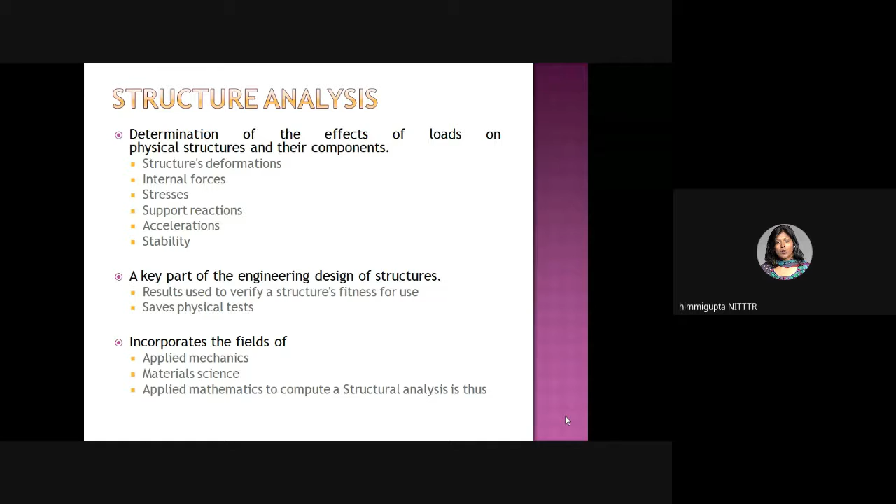So this analysis, of course, it's not a very simple thing. It is using applied mechanics, material science, and also applied mathematics, which are being used for structure analysis. So this is also quite an interdisciplinary kind of thing.

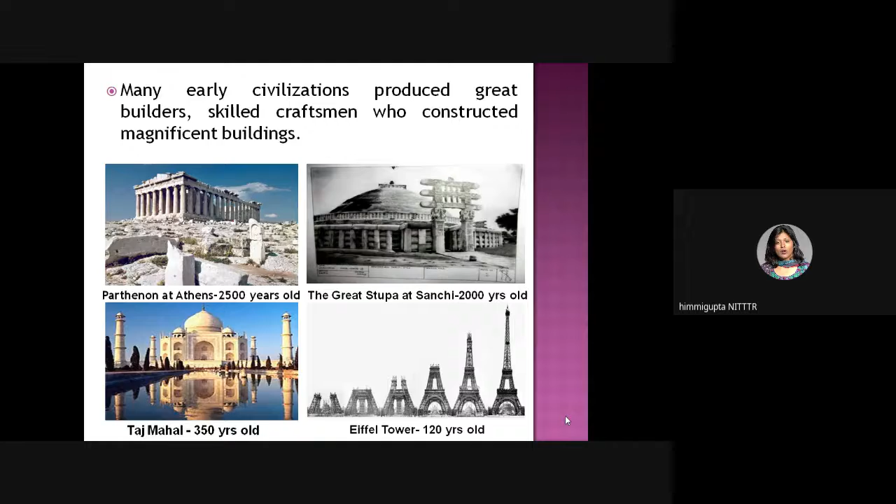There are other early civilizations who have made great buildings, great craftsmen. Examples are all in front of us, these buildings. As far as we can think of, these buildings have stood the test of time. They're still standing there. These monuments tell us what kind of feats human beings have accomplished in terms of analysis, design, and construction of large structures.

I have a personal liking for bridges somehow, because that's how I started my career. I'm always fascinated by bridges. That's why I chose that as the first career option. So definitely this is something we can always be proud of as civil engineers, the type of marvels we are creating.

These days, nothing is segregated into boxes. You cannot say that this is civil, this is electrical, this is mechanical, and what civil is doing, electrical or mechanical has no concern with. So everything is interdisciplinary, and infrastructure is, of course, a multidisciplinary task. We have civil engineers involved, we have electrical, instrumentation, mechanical engineers, architects. So many types of people are involved, so many types of specialties are involved.

In terms of structural systems, which you might remember, which we have been doing earlier and which we are teaching our students, there are many old types of structural systems which were used: arch, walls, trusses, free forms, domes, they're still very prevalent. Then frame structures, the most common one we're using these days, bearing walls, shells, tensile structures, all these kinds of things.

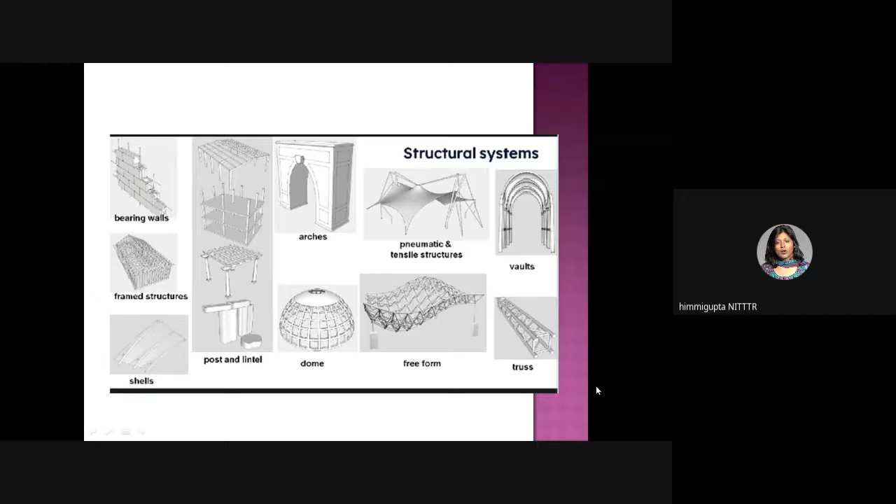So when we talk of geometry, structure, and architecture, the first point is feasibility. Is it feasible to do it? And then we look at the functionality. What will be the space used for? Accordingly, we have to go for design, the kind of columns, beams, and all we are doing. What kind of space we are designing?

Then comes the technology, which is the engineering of building. And there, if you see, the options are endless.

Another aspect which we must look at these days is sustainability, which is actually the need of time, which has become so important because our human actions are becoming such that we have relentlessly just used the resources of the earth, considering like we are the only ones on this earth. Although I know it is food for thought that we are just one of the many species which are on the earth. So sustainability has become so important.

Otherwise, if you look at all the old vernacular architecture, those times also buildings used to be there, but at that time they were all intricately had a fabric which was interacting with nature. If you look at wherever you are from, whichever state you are from, if you think of the vernacular architecture, the old types of houses that were there, let's not talk of the modern concrete jungle buildings. I talk of mountain regions like J&K, Ladakh.

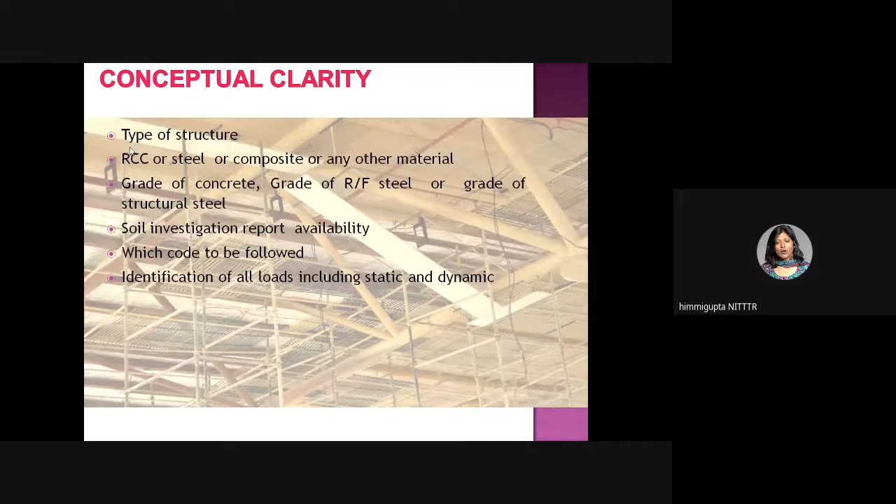You should know which code has to be followed. All kinds of loads need to be identified, then we have to decide on the method of analysis - whether to go for fully elastic, elastoplastic, or plastic analysis. The engineer should know what will work well. India has moved to limit state design, but there are still many places where working stress is used, because there's a consideration where cracking is very important, so they prefer working stress. That's a call which has to be made - conceptual clarity has to be there.

Plastic analysis is when you're going into the full limit of the concrete - not just restricting to elastic, because elastic is just a very small portion of what concrete strength can provide. Then types of claddings are very important. Construction aspects like ground clearances should be there. Method of construction, the sequence - they're all very important and have to be thought of beforehand.

Everyone is now on the site with the machinery, the material is there, but we cannot move forward because nobody looked into this ground clearance, the utilities and all those kind of things. So these things have to be cleared earlier.

Then visualization is important. You must be able to visualize the entire geometry of the structure, like lifts, stairs, openings, how will they be. It's kind of a judgment to understand, to have a whole view of what will be done, what kind of connections you want to give, what will be the critical load condition, deformation, the types of foundations.

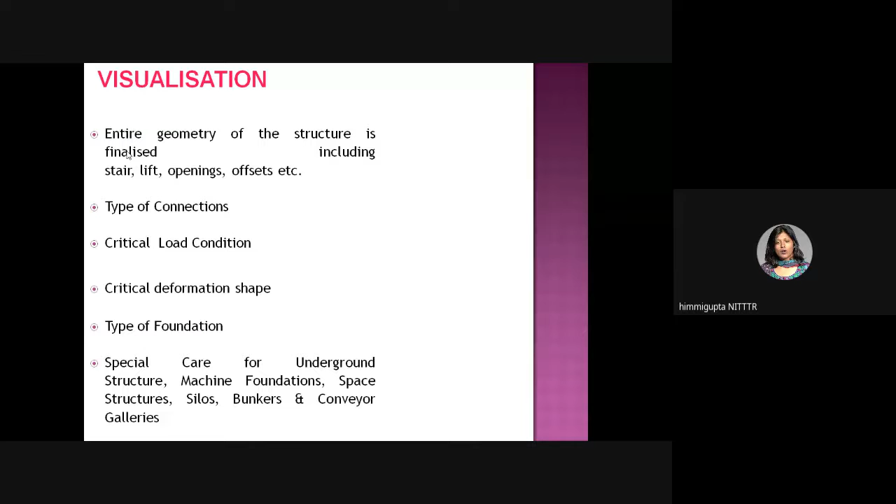Then, of course, some underground structures, machine foundations, all these kind of things, they require some special considerations also. In analysis modeling, I've already spoken a lot about it.

One thing I would definitely like to stress here, based on my experience as a design engineer. When I started my first career as a design engineer, we used to have very active discussions with the client. There used to be regular meetings to understand where everyone is, as the engineers involved in the project used to meet once a month or something.

Even when, as a design engineer, I've submitted my design drawings, when it is going to the contractor, they still used to come back to us with a lot of things. 'What happened today? The pile that you had mentioned, the way we casted it, there is a little batter in the pile in 1:12. Should we go ahead? We don't want to dismantle it, we don't want to break it. I've already put money in it. Please tell me, can I go ahead or not?'

The pile cap that I cast today is a little short on one side and a little long on one side. Can I still go ahead? A lot of things still come up, and again you're running the analysis to see with this new geometry, will things work or not, how much changes will be required. So it is a constant process that has to be met.

I would also stress on aesthetics. I have already said this, and I again and again stress aesthetics are very important. A good looking building, a good looking bridge can even fetch internal revenue for the government, via tourism. We all know the Golden Gate Bridge in San Francisco. It was built as a bridge only, but they built it in such a beautiful way that it is fetching tourism now. So the government is earning money there. Why not? What is the problem with that? We should think of those kinds of things. If we are making something, let's make it good.

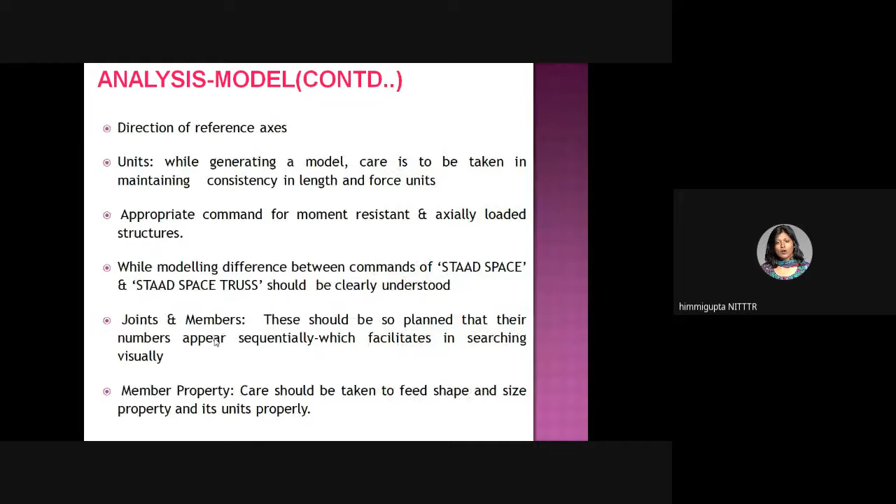Then, of course, with design, there should be understanding of various things - I will not go into detail of this. The loads have to be understood. Codes are there for us. We must clearly know which kind of loads are to be considered for this particular building.

And then post-analysis checks are very important. As I said, we should not become a dummy, just looking at 1,000 pages of output of a software. We should understand where these numbers are coming from, what these numbers mean. This is one very important aspect which we see lacking in today's students - they don't understand the basics, and we would all agree with this. The basics is what will always help us, no matter what technology comes, software or anything. Softwares are always built with the base of these basics of civil engineering also. So if you know the basics, you can learn any new software.

If you're learning a software without understanding what is happening behind it, then you will be good for that software only, with no real understanding. So we must motivate our students to build these foundation years as civil engineers when they're doing their BTech or diploma, so that they focus on understanding the concepts.

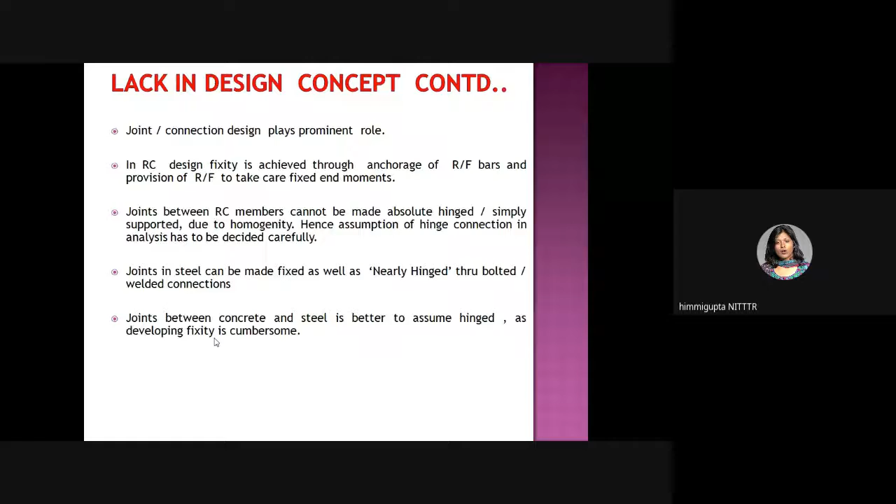That is very important. Then understanding the members - tension member, pure compression, bending, all those kinds of things should be there, because drawing is the ultimate, as I said. Children, civil engineers going in after completing their degrees and looking for a job, should have understanding of what are BOQs, what is steel detail, how the drawings are made, the kind of numbering and all that is given - those things should be known.

If we have concept clarity, construction clarity, design clarity, these kinds of problems should not arise. So these are the kinds of problems which the structures usually face. Of course, when I talk of damage during an event, that is beyond our control - that's something different.

But still, as we design our structures, we give some factor of safety, understanding that in the event of a maximum considered earthquake - as per IS 1893, there is design basis earthquake and maximum considered earthquake - that's how the code is. The code is not saying that if an earthquake of scale 9 comes, the building will not even have a single crack. That is not what we are designing for.

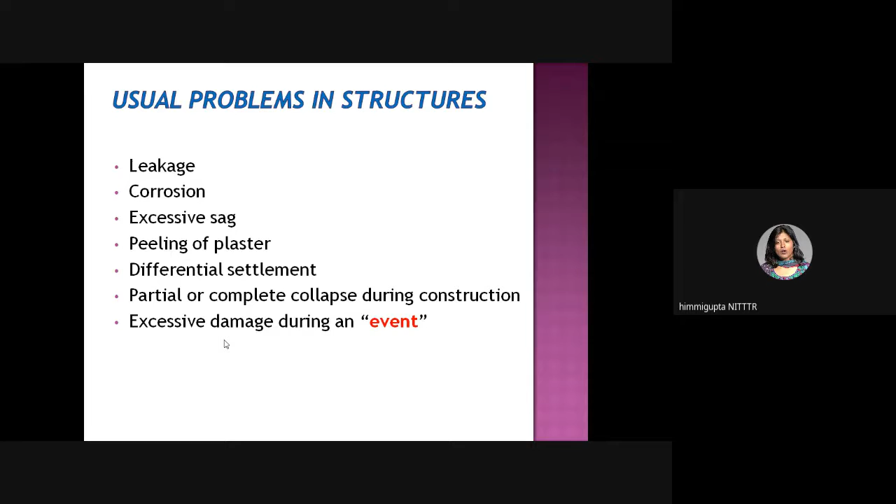That would be very uneconomical, because the likelihood of such an event happening is 1 in 100 years or something. So that building might not be used for 100 years, and if I start designing for that, I'm just making it uneconomical. So we have to understand these kinds of things.

It is very important to understand the requirement of the owner - the client who is spending money for this building. That's why when we talk of good infrastructure development, a good infrastructure development company will definitely have constant liaising with the owner about what they are requiring. And the owner is told from time to time what is happening, what kind of designs have been approved, and everything.

The requirement of the owner is that he wants to know - will there be a guaranteed performance of the structure? How much damage will take place? Where will it take place? What is the estimated downtime cost? So engineers have to be more accountable, more efficient, and more specific these days.

Of course, there are so many tools, updated from time to time, from hand designs we are now going to updated design tools. There was a time when I did my BTech, from 2001 to 2005, we did all designs by hand, and I'm so thankful to my teachers who taught us that, because today I am confident that I know what is happening in RCC, I know what is happening in steel design.

At that time, SAP and all, they were just picking up. Now, if we talk of today's students, they want to straight away start doing SAP, they would straight away want to do ETABS and FEM without even understanding what happens inside. So of course, tools are there from time to time, but as I say, tools are there to serve us - we are not there to become slaves of these softwares. You have to understand what is happening.

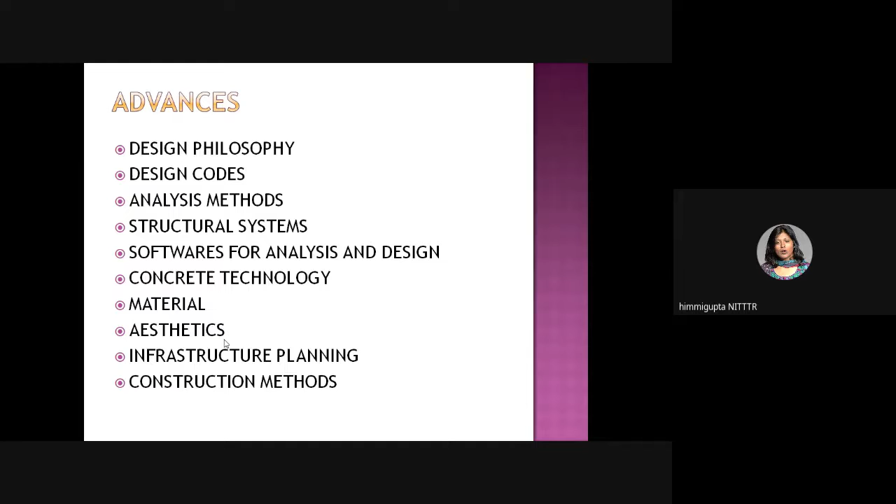Even construction methods, we have seen so many things have changed. These days we have gone somewhere else - we are talking of construction 4.0 now. So I will show you what that is. In another 4 years or so, we are set to be the 4th largest infrastructure project market. So we have to make our technical workforce exposed to these latest emerging technologies. But I would say the basics always help - if your basics are correct, you can learn any new technology.

There are so many fast track techniques also. A lot of things are coming out, a lot of imperatives. Government is giving boost to infrastructure development, because that will never stop. If a country has to progress, economy has to progress, infrastructure development can never stop. So there will never be a dearth for good civil engineers, I would say.

People say civil engineering mein boom hai, recession hai. I would say I have seen the worst of times. We have seen the times when we graduated from our BTech in 2005. It was said that civil engineering to bilkul low par hai, mitti katta wale log hai, inka job mein to kuch paisa hi nahi hai. IT was at a boom at that time. I remember IT people used to earn in lakhs, and civil engineer ki thousands mein job hoti thi. Parents used to ask, wo to wahan chala gaya IT mein, tumhari salary to itni hai. These kind of things happen.

But what I feel is we shouldn't get demotivated. What I say is there is never a dearth for good civil engineers. If you're a good civil engineer, there will always be market demand for you. You're always there to come up with good structures. If you don't know your basics, you have just done your degree aise kar liya bina kuch samjhe, then of course no good civil engineering company will take you.

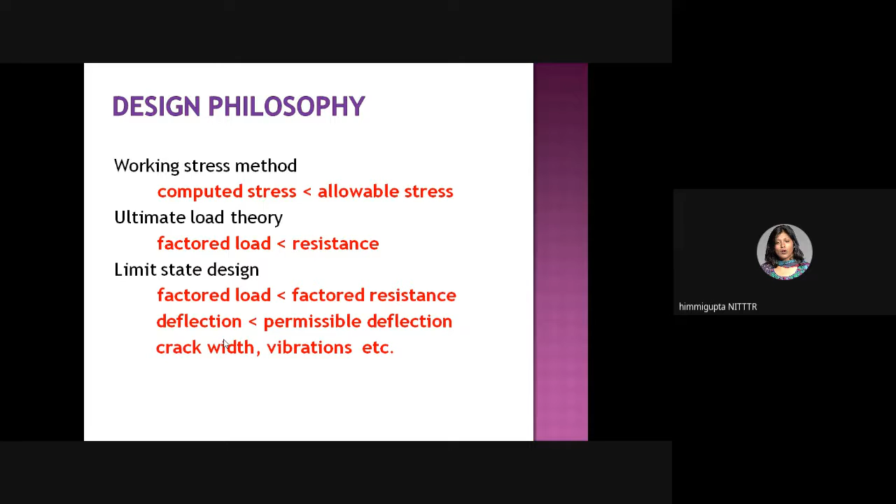I'll just skip these philosophies. Of course the earlier philosophies, like working stress and all, they concentrated more on how the performance will be, assuming that. So they were all prescriptive - they used to prescribe how it should be. A building is designed today to conform to prescriptive criteria in the codes. They regulate what will be the acceptable materials, what will be the strengths, what will be the systems - structural systems, stiffness and all. So with this prescriptive approach, we are trying to make buildings capable of providing some satisfactory levels of performance.

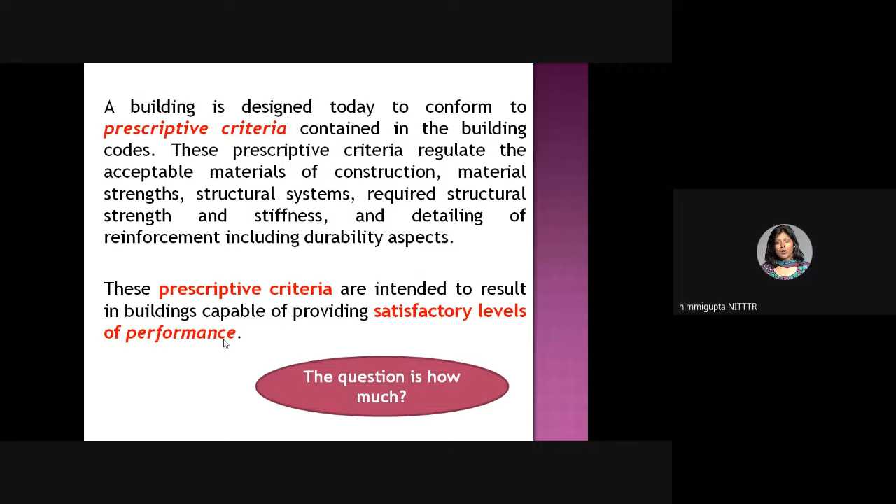So now the question is, how much satisfactory is it? That is another question which is asked. So that is where, as I mentioned to you, these days people are going for this performance-based design.

Eurocodes have already adopted this, and in India too this is picking up. I think in some years to come even our codes will be updated for this performance-based design. This is a little different from the prescriptive approach of limit state, working stress, and so on. Here, we assess the consequences of an extreme event from a given design.

This is a process that considers how a building is likely to perform under a given event, as its design reaches predefined stages. So given an event, how likely is it to behave like that? Basically, some performance objectives or indices are developed.

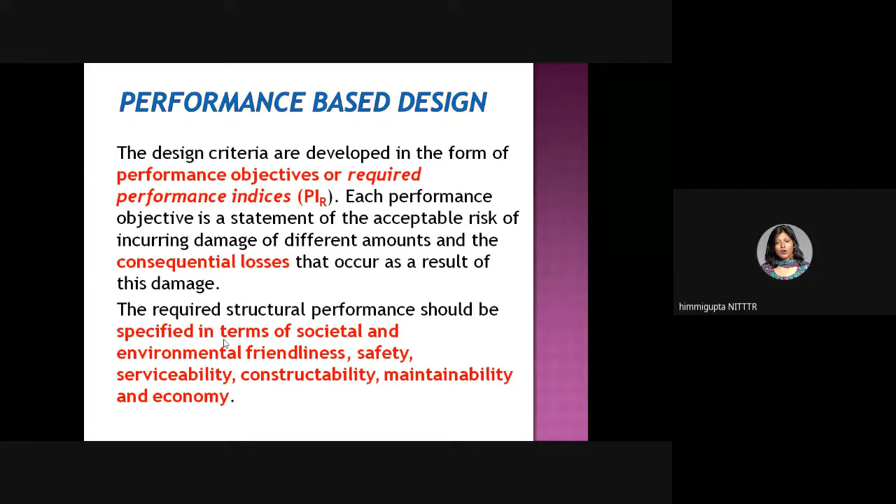Consequential losses are defined, so that under this criteria this kind of loss can occur at maximum. That's how the building is designed. I will not go into much detail, but if you're interested in this, you must look more into it.

Basically, how it goes is: you select the performance objectives, develop a preliminary design, then performance capability is checked to see if it meets the objectives. If yes, okay. If no, then you have to redesign. The objective is how the building should behave in case this kind of event happens.

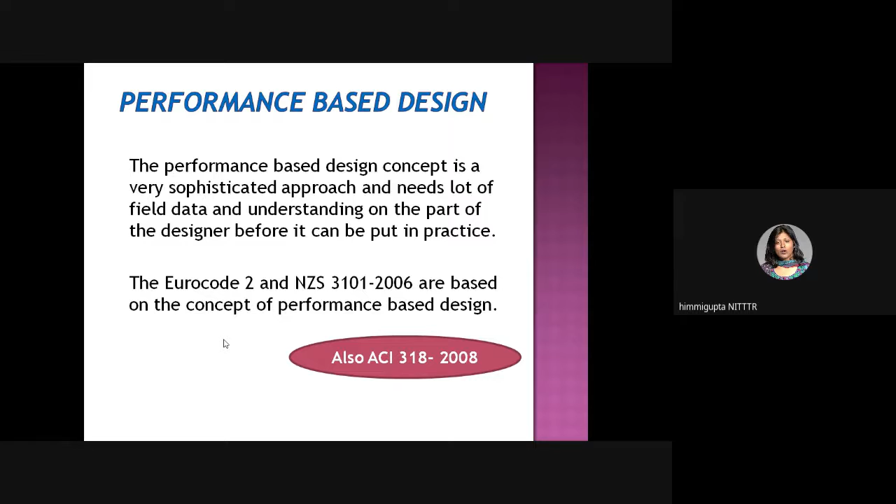There are some performance levels or indices defined. One is immediate occupancy - in case damage happens, it's to the extent that even after the damage, immediate occupancy can still be done.

Then there's life safety - the damage will be such that property loss may occur, but life safety will be ensured. The third one is collapse prevention - we're not letting the building collapse, because that is something which is never allowed.

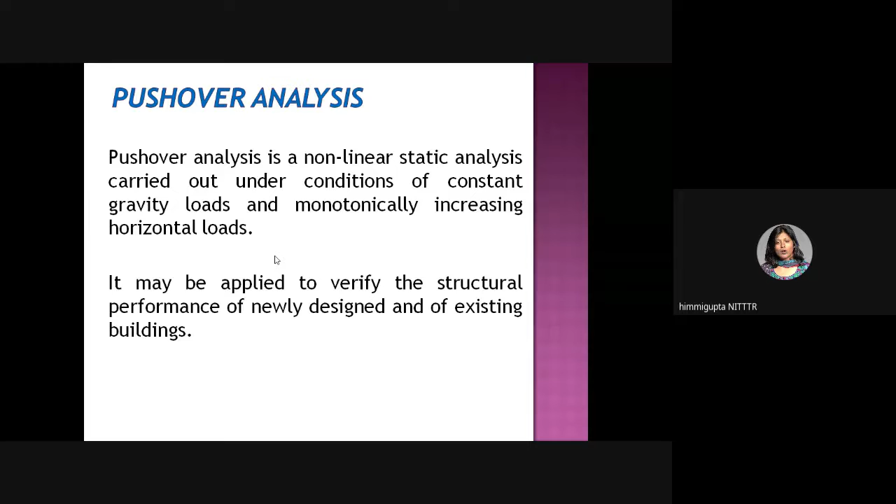Pushover analysis, which is done here, is a non-linear static analysis. Constant gravity loads and monotonically increasing horizontal loads are applied here. That is how it is done.

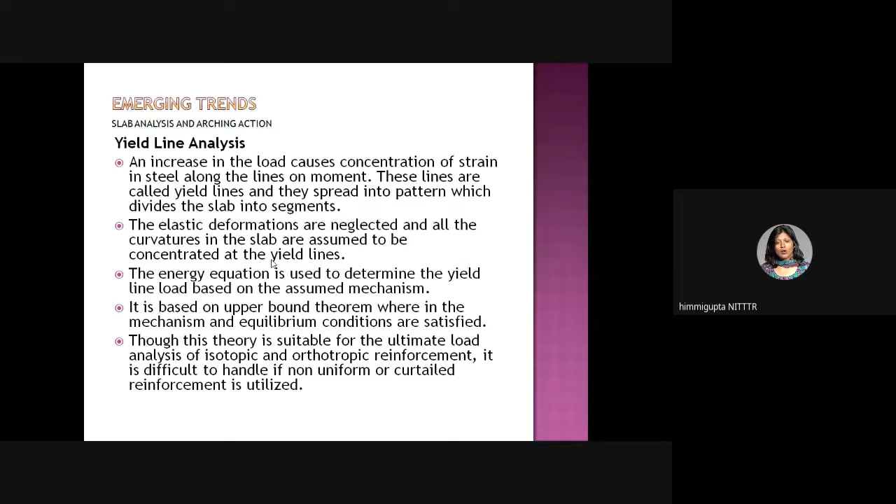Now there are other trends. If I talk of analysis, when we're looking at slabs and arches, elastic analysis of plates is something which is picking up. Yield line analysis is also becoming more and more famous, more and more prominent. So we are looking into that.

There are so many softwares - FEM is there, so many softwares are there. I always say, even Excel is a very good tool for design. We have actually done full bridge designs also with Excel.

Excel is a beautiful tool if you have the understanding of it - a lot of things can be done with it if you have an understanding of macros and everything. Even with VB and all, you can do a lot of things with Excel also. So that can always be explored.

Of course there are other things, and even CAD is very important, as we said, because drawing is our ultimate language. So CAD is very important. In India, AutoCAD is used.

MicroStation is also very prevalent on the US side - they use more of MicroStation. In India, AutoCAD is used more. Both have their strengths, both are good ones, and of course that is also required.

Infrastructure planning, as I said, is also very important these days, because different types of engineers have to interact throughout the life of a project - right from its inception, feasibility, planning, design, to construction. With this infrastructure planning, like BIM, which is building information modeling, virtually everyone is able to see what is happening in the building.

Like, say an architect has made the design, he will upload that on BIM. So the structural engineer, mechanical, electrical, they'll all be able to see, okay, this is the one. They can start working on it. So if someone does something, they can update it, and in real time everyone is able to see everything.

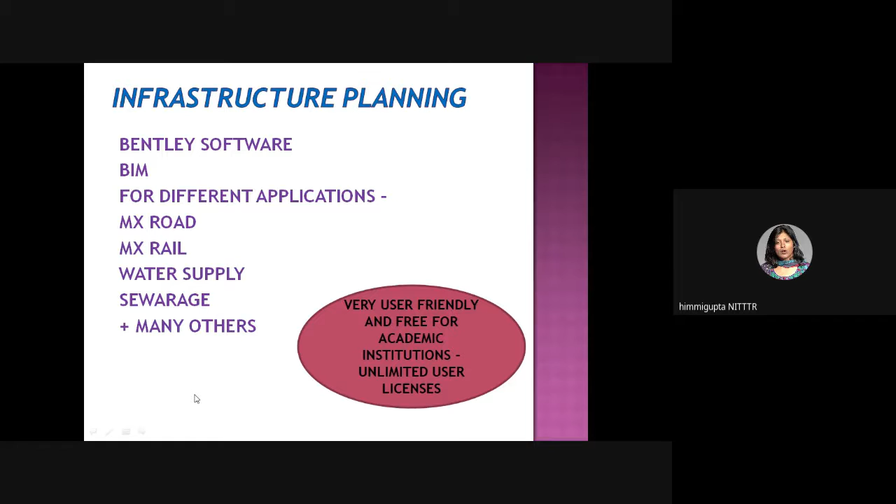Even for water, sewerage, lighting and all, these days there are softwares for everything, so the work can be made easy, no doubt. So that's what I had told you already about BIM.

Aesthetics, as I said, are very important, you can do a lot of things with it. With alternative materials, so many things are coming up. Even the government is doing a lot of things. In 2020 only, the government gave guidelines, and even IRC has now put in guidelines that cement treated base, sub base, waste plastic, geosynthetics, all these kinds of things can be used. So even the government is understanding that alternative materials are required now.

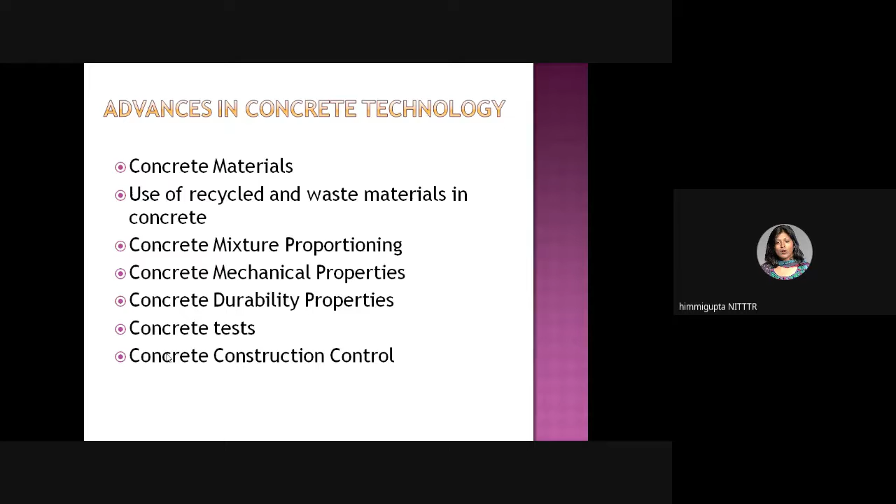In concrete technology, since we're talking specifically about RCC materials, the use of recycled and waste material in concrete is picking up - mix proportioning, mechanical properties, durability is very important, concrete tests, construction control, all these things are happening. When I talk of a concrete structure, what are the challenges?

As we said, first is the design requirement, then designing the concrete. Then during concreting, there are so many challenges - to maintain the temperature, have the placement as planned, finishing and curing should be done. Then post-concrete also there are things we have to be careful of - de-shuttering, chipping, grinding, all those kinds of things are there.

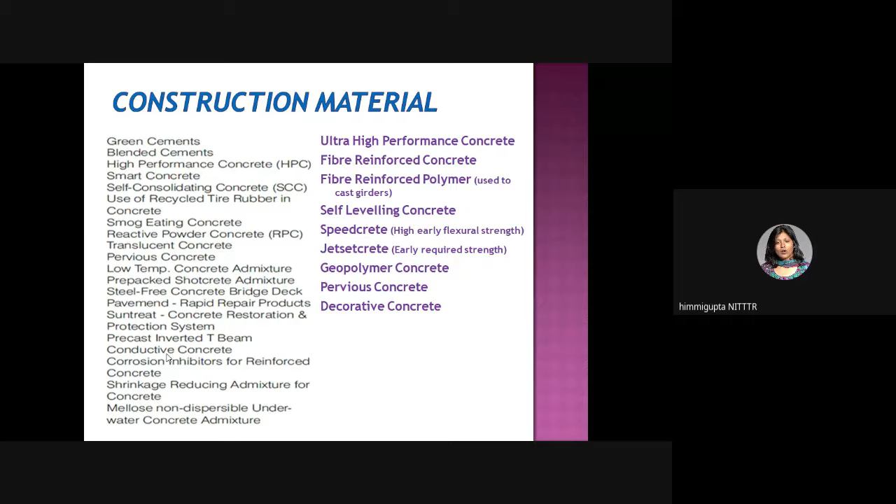And for concrete, if you see, there are so many options available now. This is a list which I just put together from Wikipedia, and this is the kind of list I found. I was so surprised to see that these many kinds of concrete are so readily available and being used. So there are so many things to see.

People are doing research. Many are claiming that we're trying to clean air with our concrete. Although concrete, a few years back, got quite a bad name because when we do cement production, almost 1 ton of cement means 1 ton of carbon dioxide we are emitting into the atmosphere. So it's not environment friendly. So there are so many things that have developed after that to offset these kinds of issues.

So people are doing this - a Stanford professor is trying to make cement that produces no carbon dioxide. Okay, so these kinds of things are there. Smart concrete, these days we have, wherein we are adding carbon fiber, almost 0.2 to 0.5%, so it is able to sense strains and stresses, and it also has good mechanical properties.

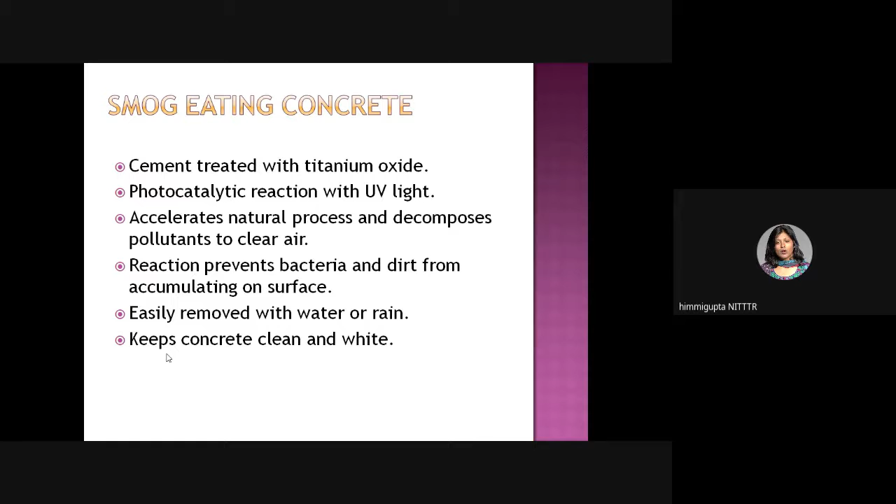There is smog eating concrete that people have developed. They put titanium oxide in it, so a photocatalytic reaction with UV light accelerates the natural process, and it decomposes the pollutants, giving clean air. Even bacteria and dirt do not accumulate on the surface, and it can be easily removed with water or rain. That's how it looks white and clean. This is called smog eating concrete.

Then RPC is another one of the high performance concretes - reactive powder concrete. It has very high, ultra high strength, and high ductility. The microstructure is optimized so that there is precise gradation, giving good maximum density. We are using highly refined silica fume also, so it's very widely used, definitely for special projects.

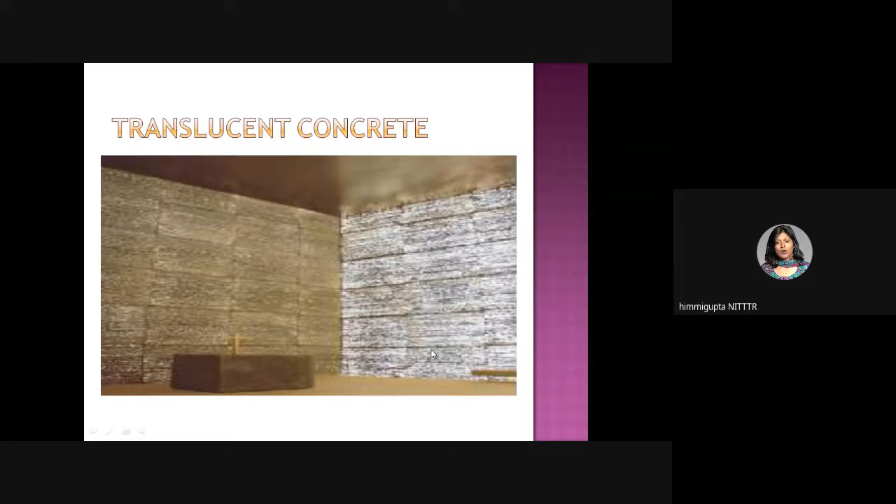Translucent concrete, I want to show you the picture first. This is translucent concrete. If you see, this kind of light is also getting emitted through it. Basically what they're talking of is embedding optical fibers inside it, so it can be made good looking also.

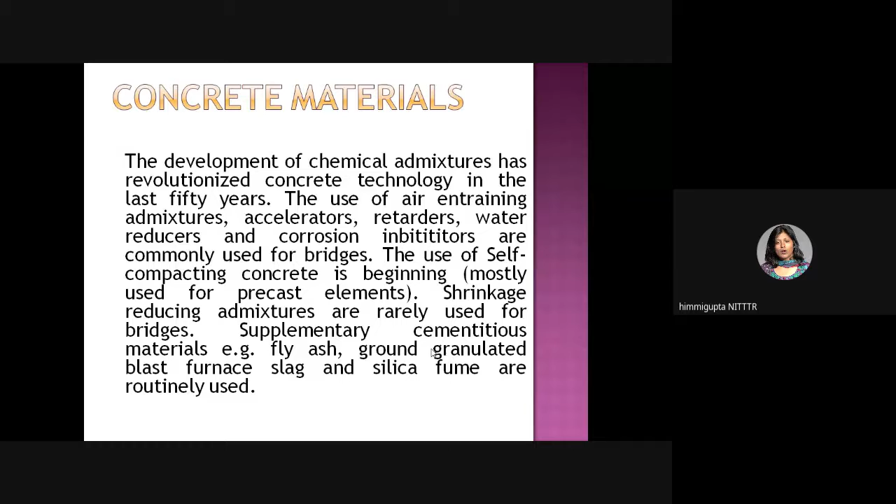There are so many advances in chemical admixtures these days with the shortage of water. Many people are now moving towards curing wherein water is not at all required. They're using admixtures for curing. Other types of admixtures are there, like rapid setting and water reducing admixtures. There are a lot of things available in the market. If you go for Fosroc, Sika and all, they have given a lot of options for that.

Recycled materials are being used. Granulated blast furnace slag is there. Fly ash is very common these days. It's good to see with new infrastructure projects, people are going for fly ash bricks now. A lot of other materials are also being tried here, so the cement component of the concrete can be reduced, or we can even reduce the fine and coarse aggregates, because those are also natural materials we are falling short of.

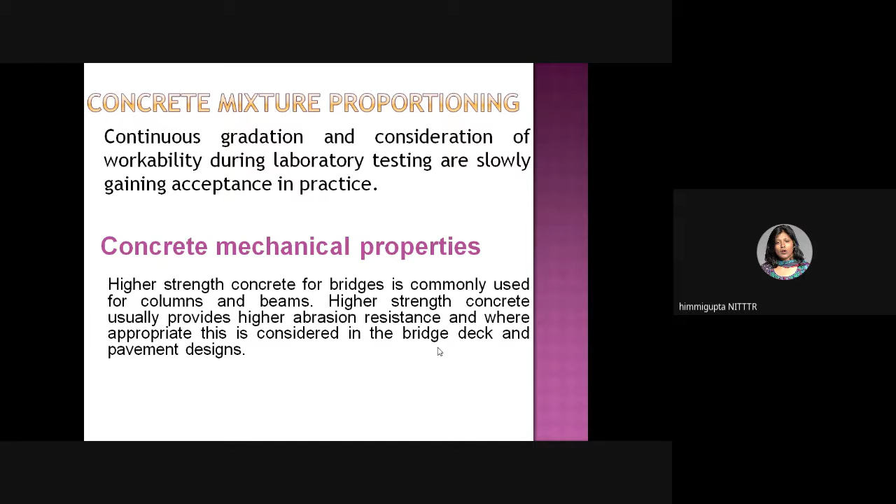Gradation is very important. That is where we can play around and get a good high strength or good performance criteria also.

Durability is of course very important these days. RCPT test has become very important. People are going for it, the rapid chloride permeability test, to see how durable the concrete will be. If we are making a structure, we like it to be durable, long serving and everything.

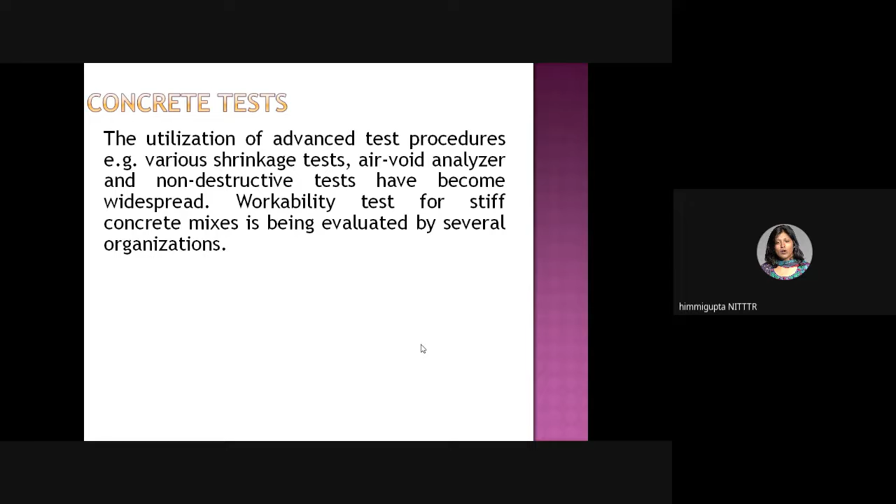Even test procedures, there are so many things. NDT these days can do a lot of things for you without having any field lab tests or anything. A lot of things are happening there also. In construction control also, we are seeing so many things. I will show you in consequent slides what is new with respect to construction control.

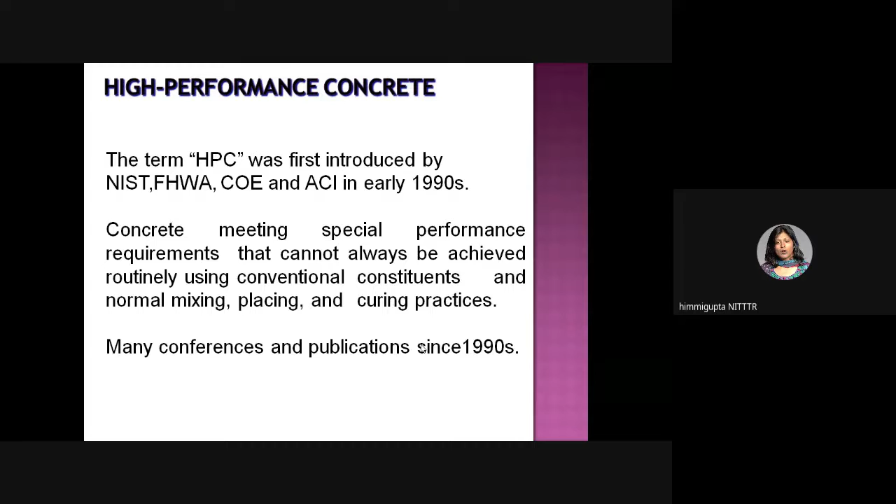Then we come to high performance concrete, which I think today's engineer must know this term. High performance concrete is something wherein we are trying to have a concrete which has a specific criteria, wherein it is giving some good performance criteria. Maybe the criteria is placement and compaction without segregation, or early age strength. It may be enhanced mechanical properties, volume stability, or durability, like low permeability, abrasion, fire resistance.

If you're talking of very cold regions, very cold countries like Russia and Canada, freezing and thawing is a big issue. They want their concrete to behave so it doesn't get damaged with that kind of weather. High performance concrete can solve that problem. So a particular concrete is developed for having a particular given property.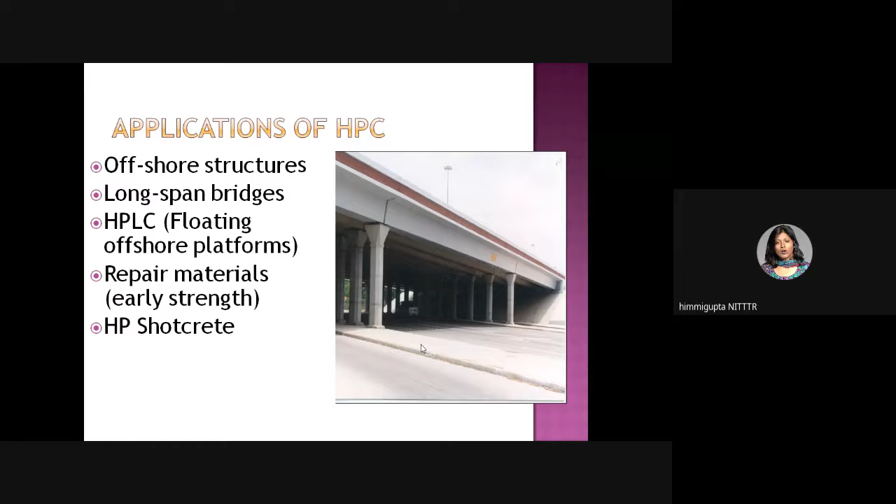Generally we might talk of high strength, good durability, good workability being used a lot these days, in basic structures, in even important structures, in repair materials. It is highly used, and of course there are advantages of it. First of all, you're trying to achieve one particular aim for that particular concrete. You can have superior qualities of it.

Reduction in structural steel can be done. High performance concrete can reduce the amount of reinforcement also, with ductility, energy absorption in seismic areas or where winds are an issue. These kind of things can give you great flexibility also.

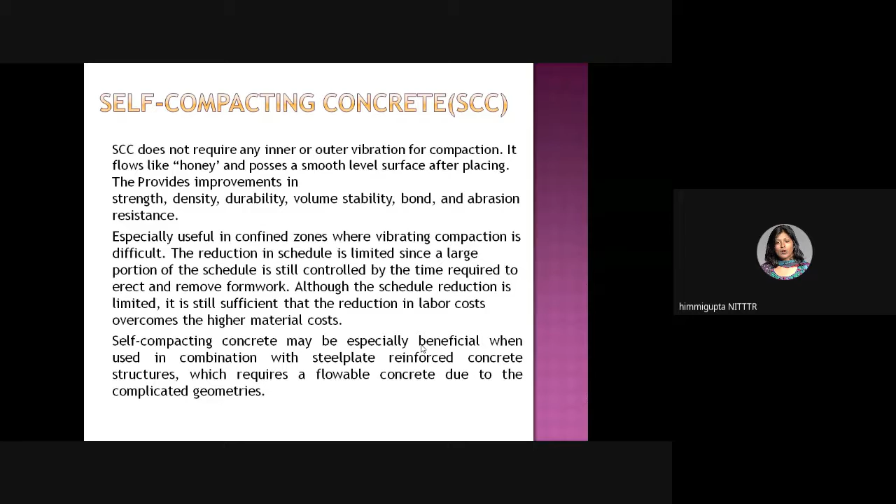Another concrete which is very famous, very popular these days, is self-compacting concrete, the SCC, the flowing concrete as we call it. It is very popular these days basically because it flows just like honey, and it poses a smooth level surface after placing. It has improvements in strength, density, durability, volume stability, abrasion resistance. So this is also being widely used these days.

People are also going these days for lightweight aggregate concrete. Mostly earlier we used to use aggregates of volcanic origin. Waste like from the palm oil industry can also be included as aggregates, so thermal treatment is of course required. People are going for this lightweight aggregate concrete also, to achieve adequate strength and thermal insulation.

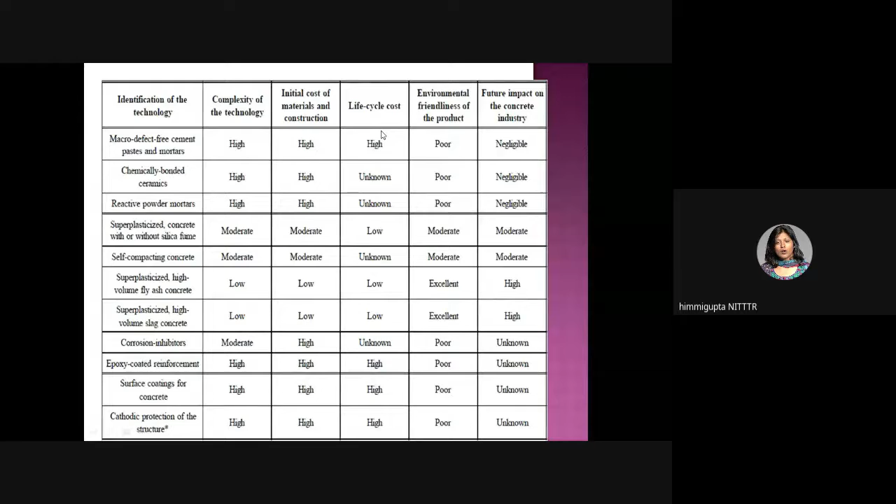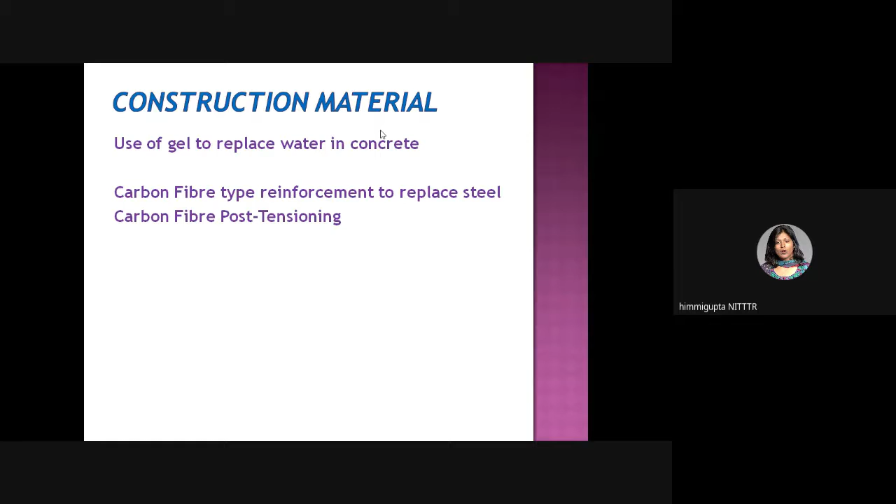Many now in construction material otherwise also, like for water replacement, gels and mixtures are there, and reinforcement is being replaced by carbon fiber type reinforcement or post tensioning reinforcement. I think this I've already shown you.

Precast industry is picking up a lot, because precast is a good option when you're talking of something which has to be duplicated many times. You can set up a yard close by, and precast can be very economical. So it has a lot of options and applications. It's time saving, economical also, and quality is there because it is made in very controlled conditions and then brought to site, as against concrete wherein you are completely relying on the workmanship of the person casting it at that time.

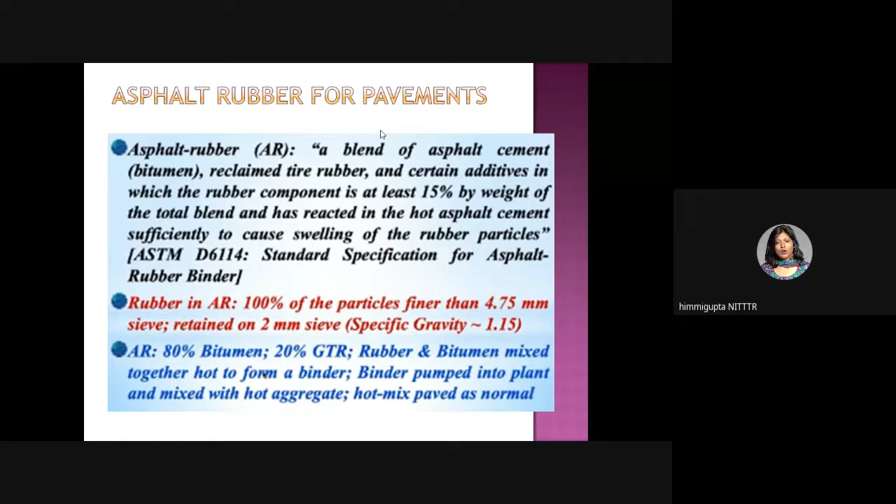This is one place I came across recently. Someone was discussing this asphalt rubber, used for pavement. It's a blend of asphalt cement, bitumen, with reclaimed tire rubber and additives, about 15% by weight. They are being used in the hot asphalt cement. ASTM is there, and it's giving beautiful results. So people are going for alternative materials now. What they observed was smooth ride, less cracking, less maintenance, more durable loads, better skid resistance and rut resistance.

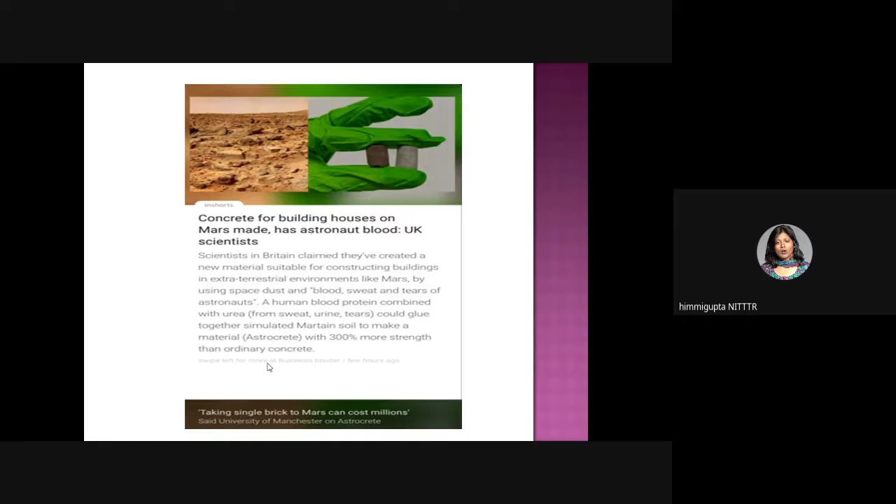This is something I read in the news one or two days before, and I thought of including it here. Now, humans are talking of building houses on Mars, so they're trying to find materials because taking material from Earth will cost a lot. Scientists are looking into options for materials that can be harnessed or created on Mars itself, and they've already had some breakthrough making concrete for building houses on Mars. UK scientists have done this using space dust and the blood, sweat, and tears of astronauts. Human blood protein, combined with urea from sweat, urine, or tears, can glue together to simulate Martian soil and make a material with 300% more strength than ordinary concrete, that's what they're saying. I'm not debating the use of blood and everything, I'm just trying to show the technology part here. People are looking into a lot of options.

The person who made it claimed it could carry a load of 21,000 kgs. But at that time, they didn't have the testing mechanisms we have these days, like pile load tests. So to give confidence and show that it was working, the inventor actually sat inside the pipe to show that his design was reliable.

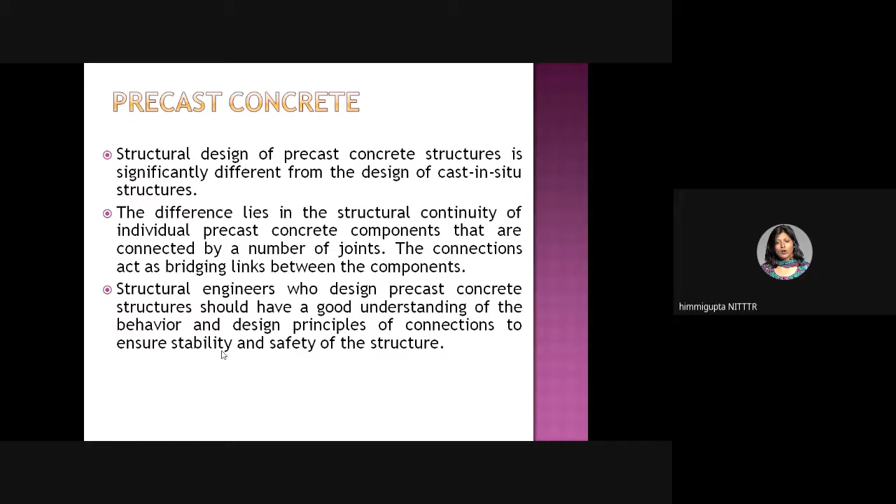So in precast, as I said, quality control is there, but there has to be good knowledge of the connections, because connections are very important here. Basically, you're taking beams and columns already cast and bringing them to the site, then putting them together, so connections are very, very important. This relates more to design for progressive collapse, diaphragm action in floors, joints and connections. Detailing is very important.

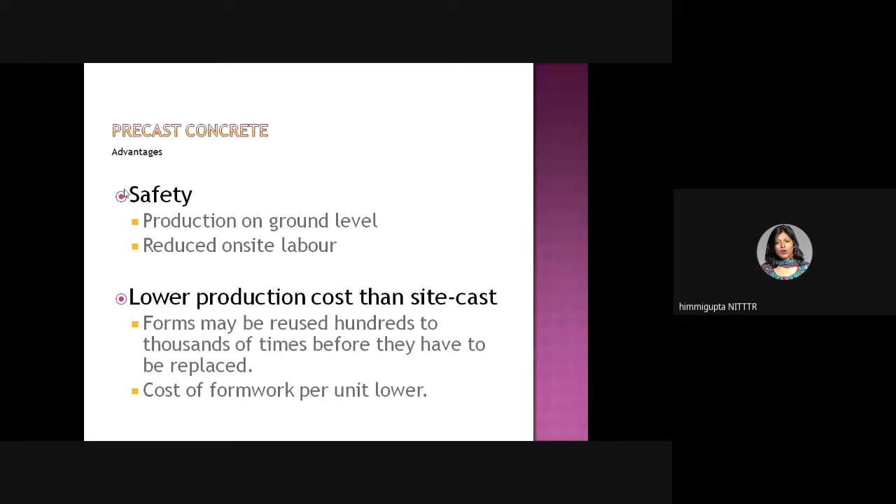So these are all the things I've already told you. Safety is of course there. You can produce on the ground level, and you are just placing it at high levels. People don't have to work at high levels, so that safety aspect is there. Then lower production cost than site cast, but again it will be more viable when the quantity is more. Fire and chemical resistance, low maintenance, efficiency, because quality control is there. So there are a lot of applications for it, and on top of that so many things are there.

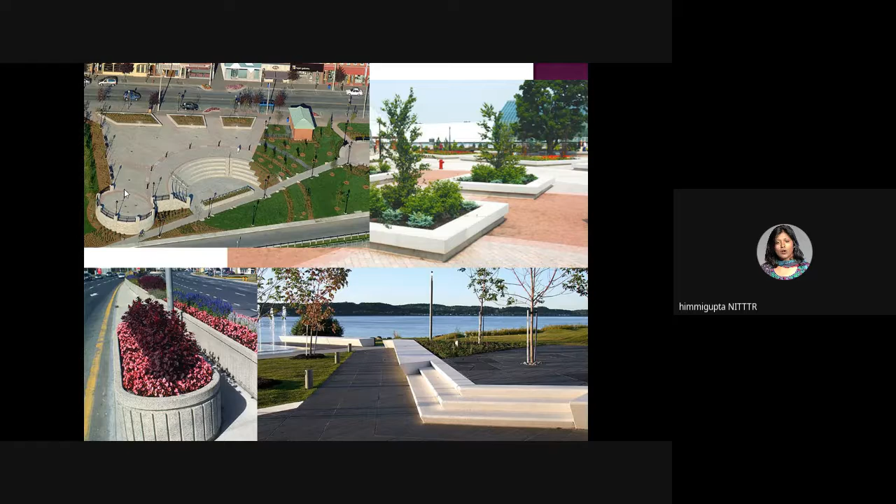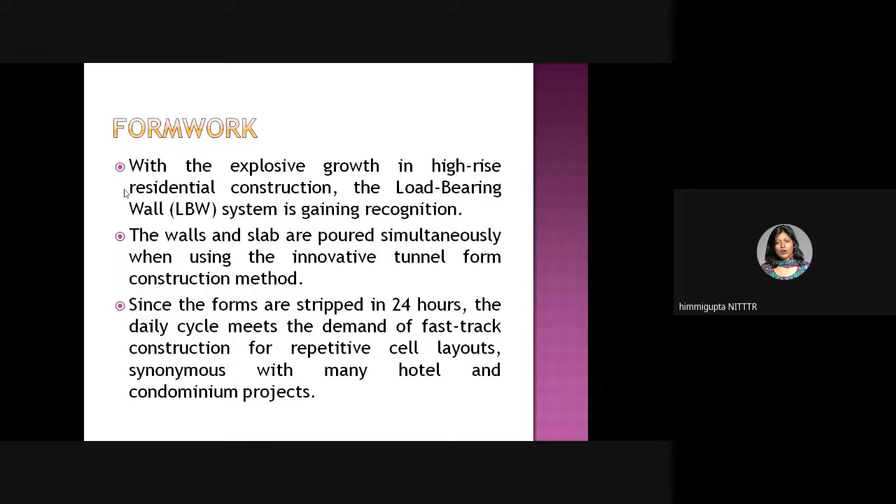Some examples, even in soil retention, panels and all. Formwork is also very intrinsic part when we talk of concreting, concrete structures. So formwork also, there are so many things which have gone up. So even there are so many options.

We are talking of slip forming these days, wherein vertically you can go very fast. So you use a formwork, cast it, and then you just slip it up. So next for the casting can be done, slip it up. Similarly, you can go horizontally also over long distances like this.

Even load bearing walls, there are a lot of things which have happened here also, like tilt up techniques and all. They've nearly lifted 100 feet. So there are a lot of things which are happening here.

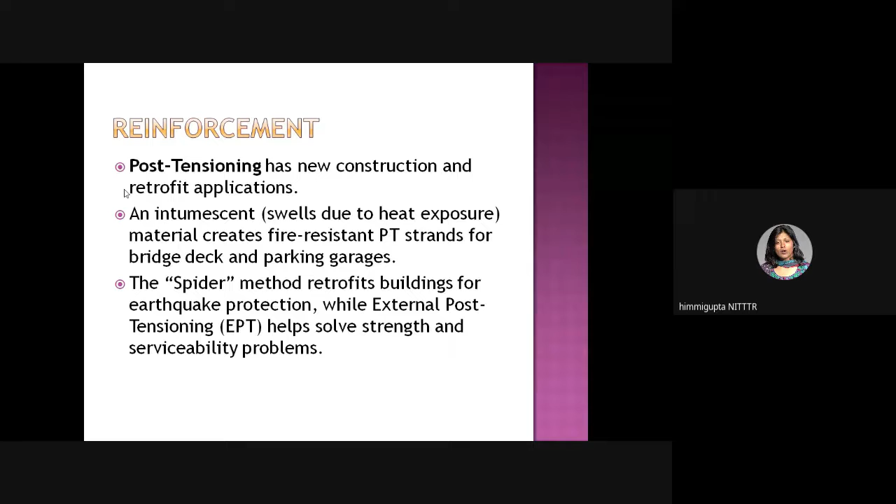Then reinforcement, as we said, post tensioning is a very good method. External post tensioning is also done, internal post tensioning is also done. And we are going for reinforcement carpets also these days, which reduces the shipping and erection cost.

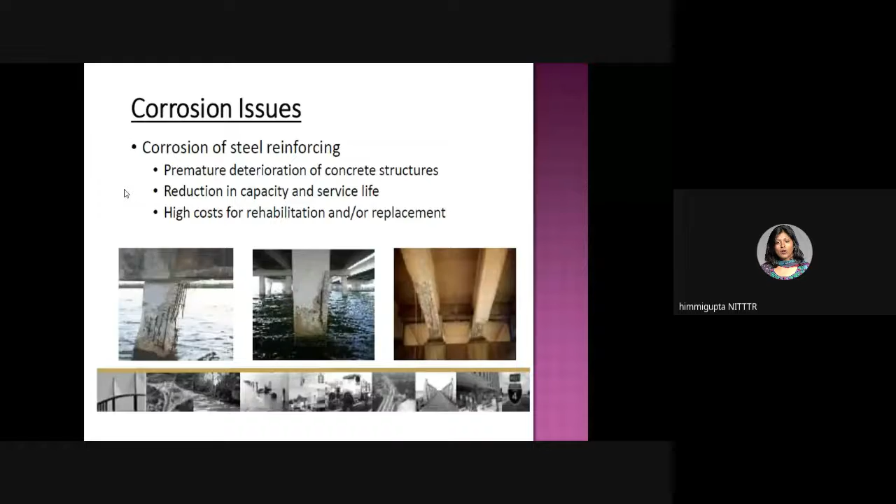Then for corrosion also, especially in coastal regions, this is one of the biggest considerations for design. There are cracks, there is alkalinity, all this kind of things are there. So for that also, there are a lot of things. Even alternative reinforcements are coming up. We can go for FRP, fiber reinforced polymer, epoxy, stainless steel, galvanized ECR, Z bars.

Concrete quality, of course the covers, the corrosion inhibiting admixtures can be put. Prefabricated FRP beams can be used. So there are rebars which are made of fibers which are embedded in the polymeric resin. Basically these kind of things are also there, what you can see here.

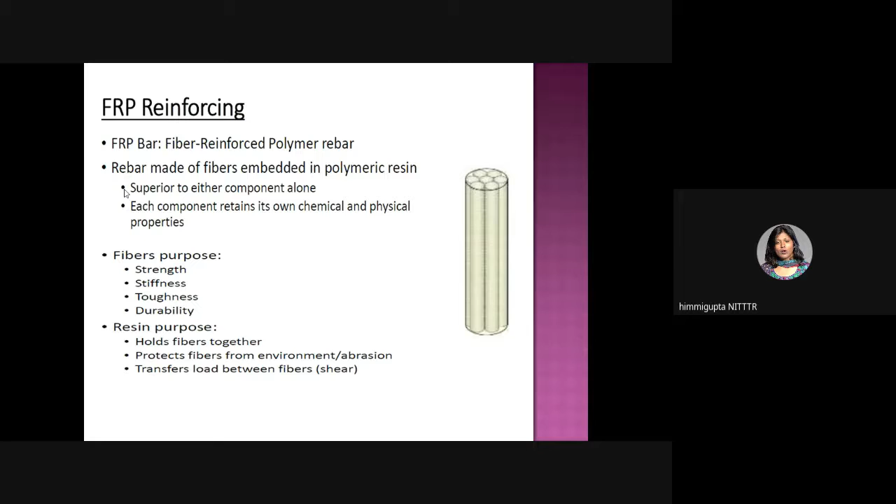And there are fiber types - you can use glass, carbon, aramid, basalt. Then for resin, if you go for thermoset types, there is vinyl ester, polyester, epoxy. Vinyl ester is many times preferred for RCC, their glass fiber is preferred. So they have advantages - corrosion resistance, high strength, all those kind of things are there.

Sometimes the disadvantage may be high cost or something, but then again, if you're talking about specialized structures, these kind of solutions are always welcome. Then FRP reinforcing, as I said, that is also being used.

And of course, there are a lot of things - not only as reinforcement, FRP as big reinforcement bars, but also we can put discrete small fibers in the concrete. So they also serve as, they are made a part of the concrete mix. So that is also a viable option. That is called FRC, fiber reinforced concrete. So their fiber type, volume ratio, aspect ratio, those things become important.

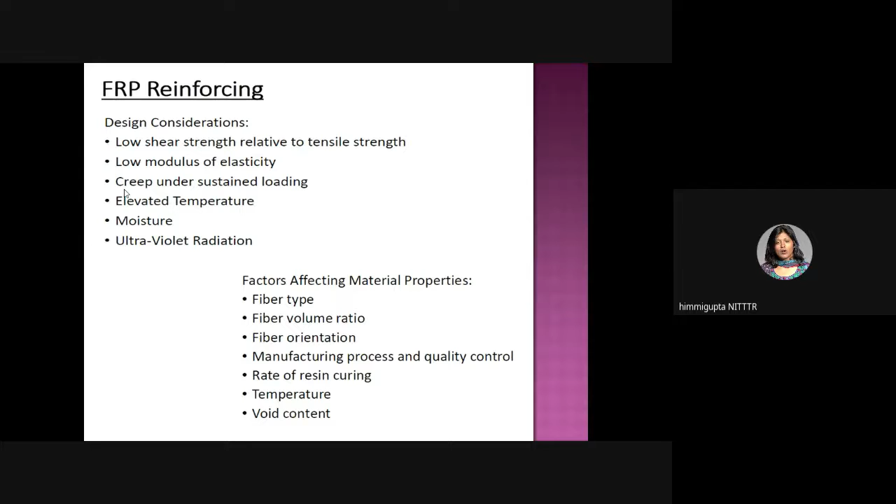I'd like to discuss something on innovative structures. We are coming up with so many innovative structures, new design concepts, new materials, new technologies, superior performance.

A recent marvel is the Statue of Unity. It is definitely a structural engineering and construction marvel. A sleek statue, it can take wind speed up to 180 kilometers per hour, it is earthquake resistant up to 6.5 magnitude, and it is a green and sustainable design also.

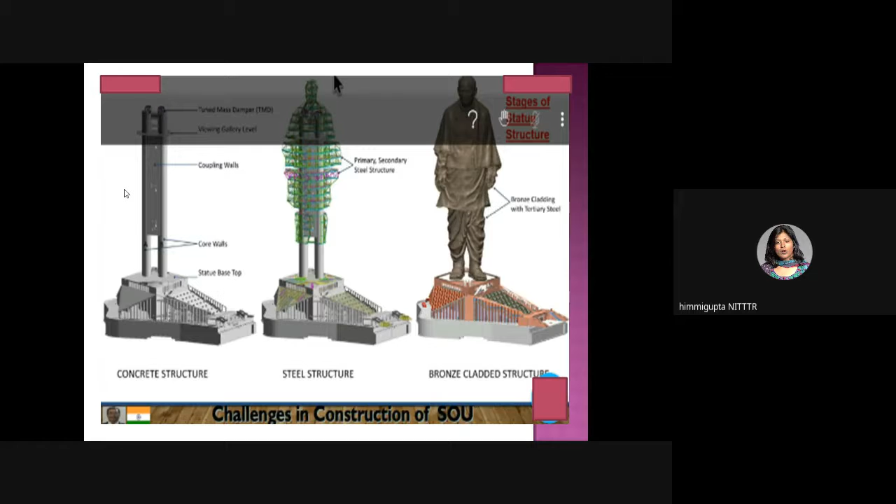A lot of challenges went into it. First they built up a concrete structure, then a steel structure around it, and then the bronze cladding happened outside it.

Logistics also, as I said, you have to understand, not just make a design, you have to understand how you will mobilize your equipment there. To have something this tall, you need big cranes, and you have to see how you will move your crane around the site. Many times you won't even get a very free site, it may be congested places, like you're building a flyover in an already busy area. So all these things have to be looked into.

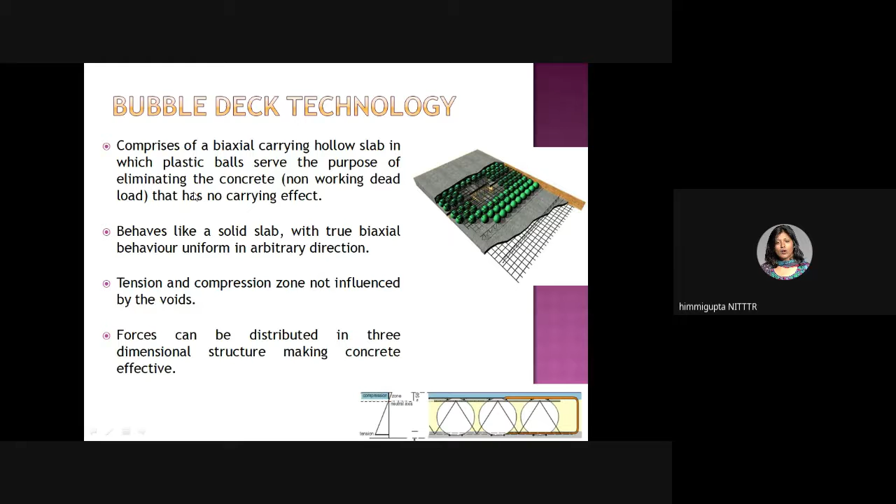There are technologies people have used, like this bubble deck technology. Basically they are using biaxial carrying, a hollow slab in which plastic balls serve the purpose of eliminating the concrete, which is just a dead load. So it behaves like a solid slab, biaxially distributing the forces. It has been demonstrated in a university building in Toronto, so if you have interest you can look into that. They have reduced the weight, reduction in slab mass means less material, and they got even a green building certification for that.

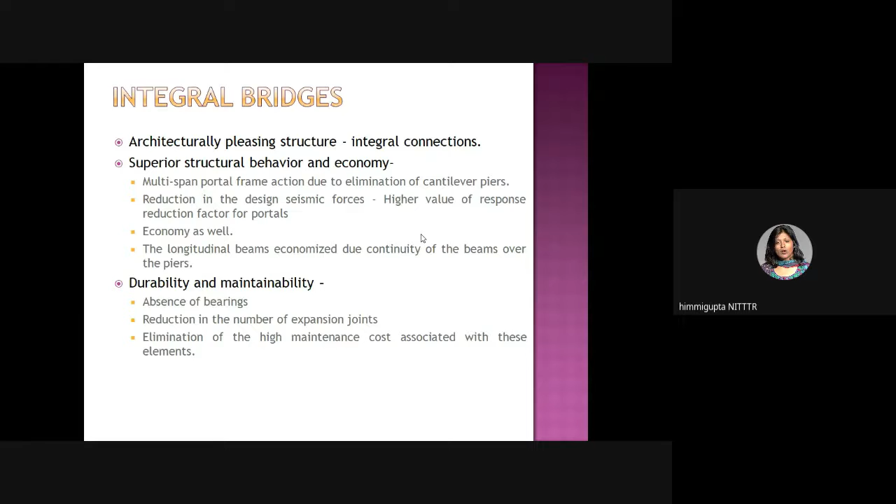Another very nice arch bridge is coming up in India, which is being claimed to be the world's highest railway bridge, from Kashmir. This is on the bed of the river Chenab, part of a 272-kilometer rail link project which is being constructed. It is 35 meters higher than the Eiffel Tower in Paris - this Chenab arch bridge.

Another civil engineering marvel, I would say. It will have a dual carriageway, 14 meters, a 1.2 meter central verge, design speed going up to 100 kilometers per hour, and a 120-year lifespan is what they have designed and will be constructing. It can take wind speed up to 266 kilometers, temperatures even down to -20 it can stand, earthquakes up to 8 magnitude, and high intensity blast it can stand.

They have used BIM software here, as I had mentioned. This is, I would say, the most recent trend that is there, so I want to share this with you.

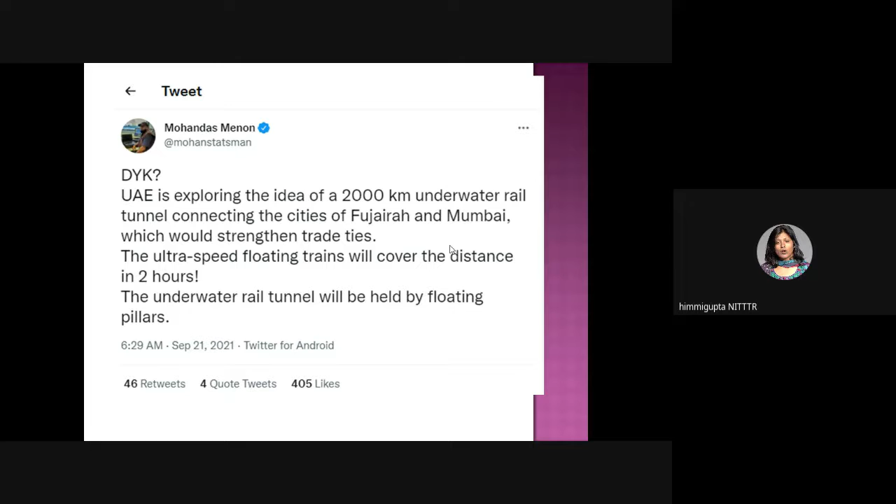I inserted this latest update in the evening. Yesterday I was reading on Twitter that UAE is exploring the idea of a 2,000-kilometer underwater rail tunnel which they want to connect to Mumbai for trade purposes. There will be ultra speed floating trains which will cover the distance in 2 hours. They are looking at this underwater rail tunnel held by floating pillars. So you can see where the technology is moving now.

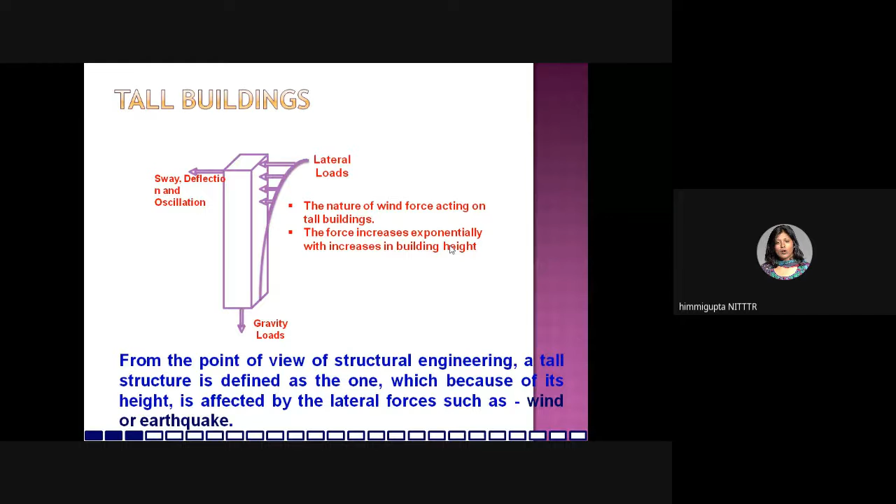Tall buildings are required now given the kind of urbanization happening. The land is less, the population is more, so we are moving from low rise towards high rise, tall buildings. From the point of view of a structural engineer, because of height there are wind or earthquake secondary loads which come into play.

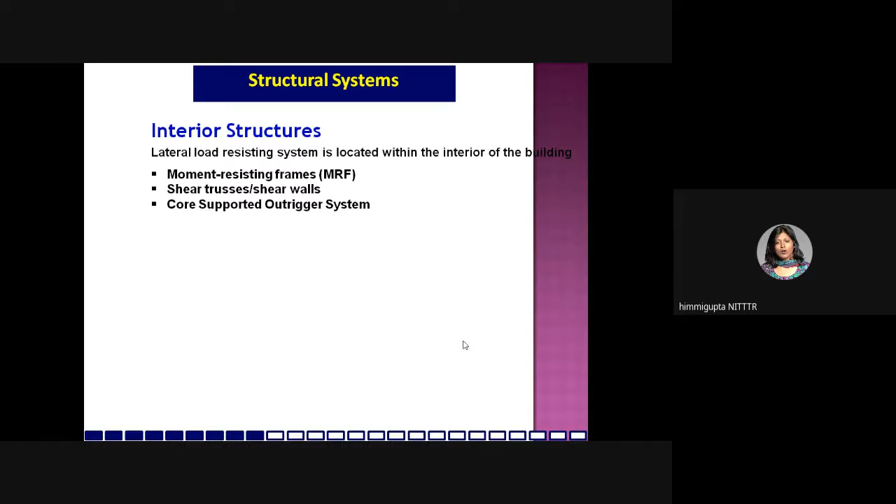Design aspects, of course, a lot of things are there - strength, stability, serviceability, human comfort has to be there. There is a recent code also, 16700 by IS, for this. It can go for moment resisting frames or core supported outrigger systems. These are the structural systems which come into play for tall buildings. For exterior, you can go for braced tubes or diagrid systems, all these kinds of things - I will not go into details.

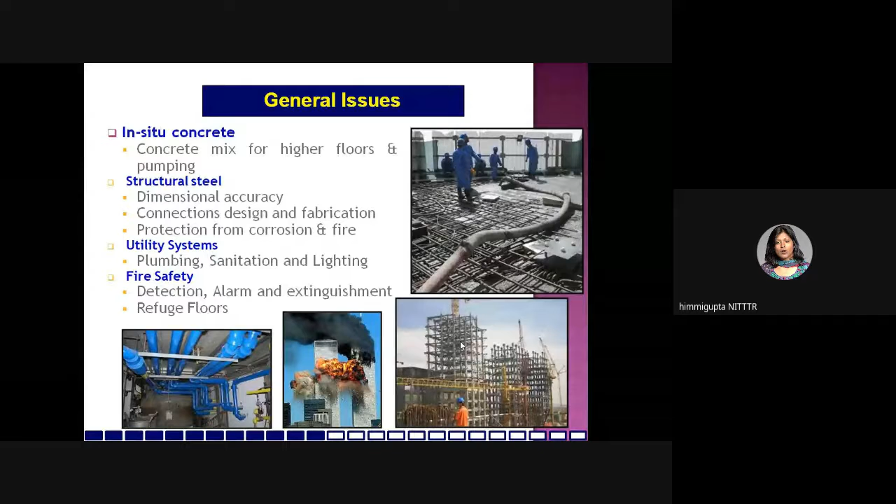But the issues are always there. Mainly, when you're at higher floors, the pumping of concrete becomes a little issue. For structural steel, you need dimensional accuracy, fabrication, protection from corrosion and fire because it's a tall building. Then utilities have to be provided right till the top, fire safety has to be there properly. Working at height is of course a safety issue for the workers - impact injury and all, earthing of the equipment has to be done. These are all issues which have to be taken care of during construction.

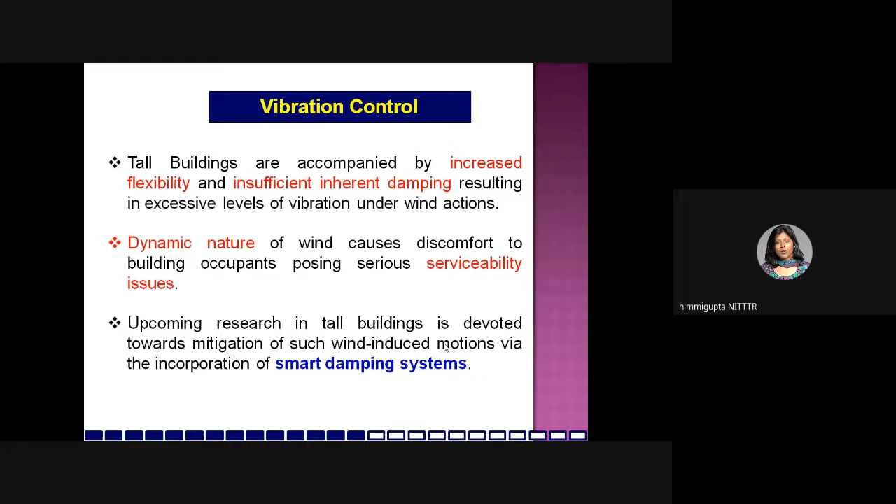Vibration control is also required - we understand at higher heights the winds become prominent, so there's an issue that the building might become resonant to the vibrations. Those things have to be taken care of. There are many vibration control devices which are there, of course, to tackle these kinds of issues.

Even glass facade design - people like to go for glass, but as I said, you must look into the climate where you're locating the building to see if it's viable. And even if you're using glass, there is high performance glass which can take care of insulation and everything.

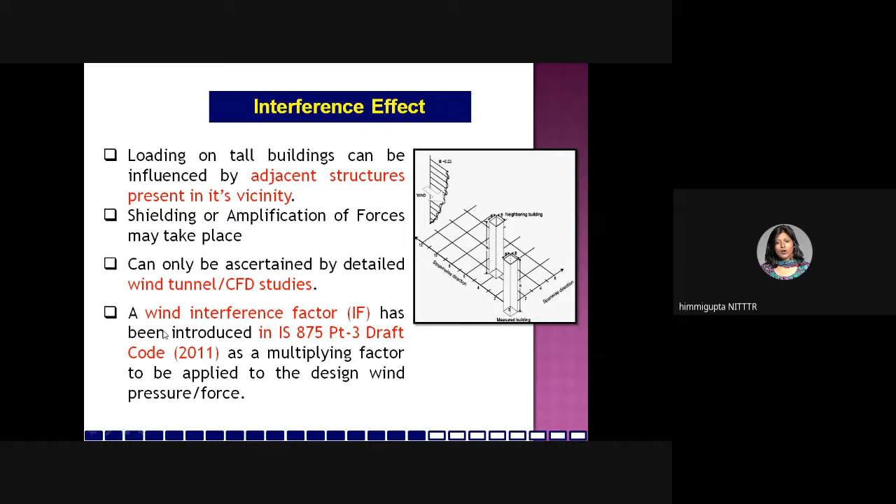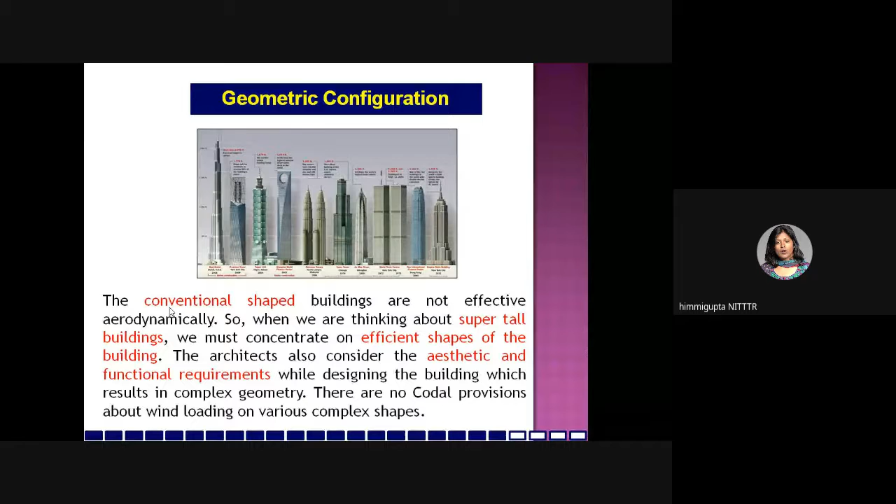Interference effect is another aspect - the loading on tall buildings can be influenced by adjacent structures in its vicinity. A neighbouring building can also affect how your building behaves, so wind tunnel studies become important here. Many times it's a discomfort for pedestrians too because of this effect when a tall building is there - someone standing on the road will experience this kind of turmoil. So these kinds of things have to be considered, and even geometrically you want an efficient, streamlined shape so that loads are just going by.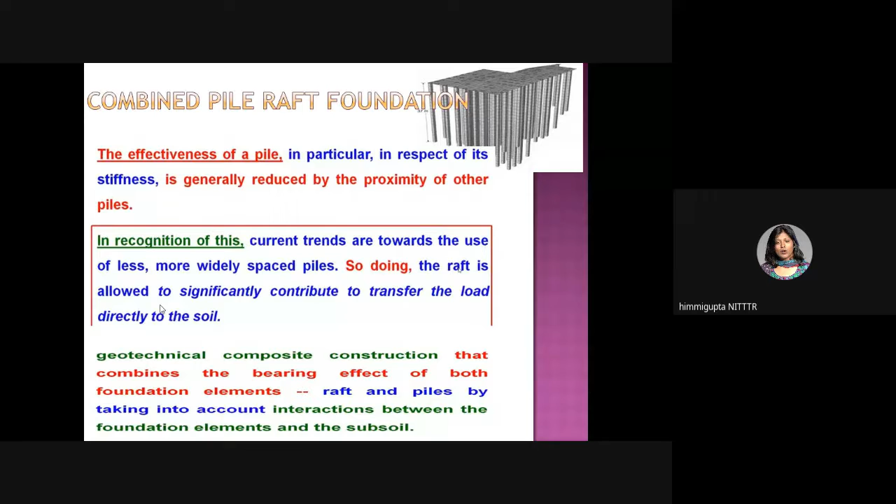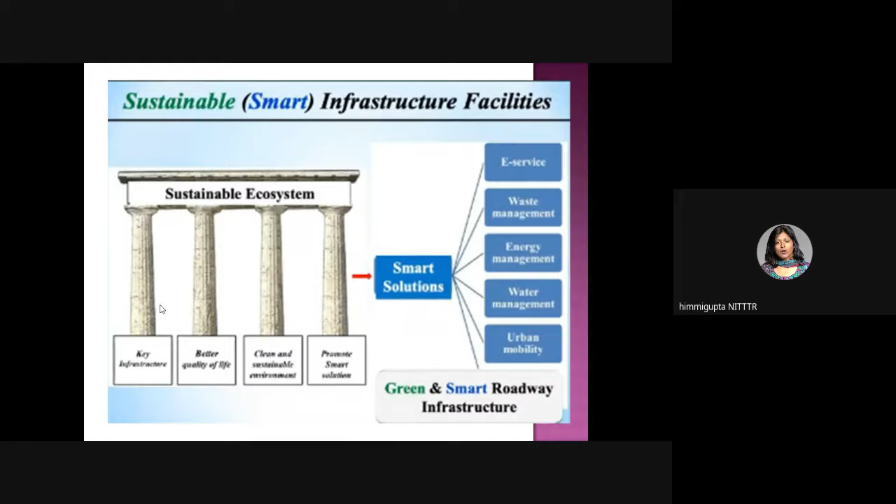Another aspect is sustainability. The idea is the citywide expansion should be consistent with urban growth, transparency, user participation, market orientation, capacity building, and local empowerment. So if I talk of sustainable and smart infrastructure, basically water, urban mobility, energy, waste, e-services - all these things should be there.

So that is very important for sustainable design, material wise and everything. People are going for pervious concrete these days because of the hue and cry that with all the paved surfaces we have created, groundwater is depleting since natural percolation is not happening. So pervious concrete is there for that.

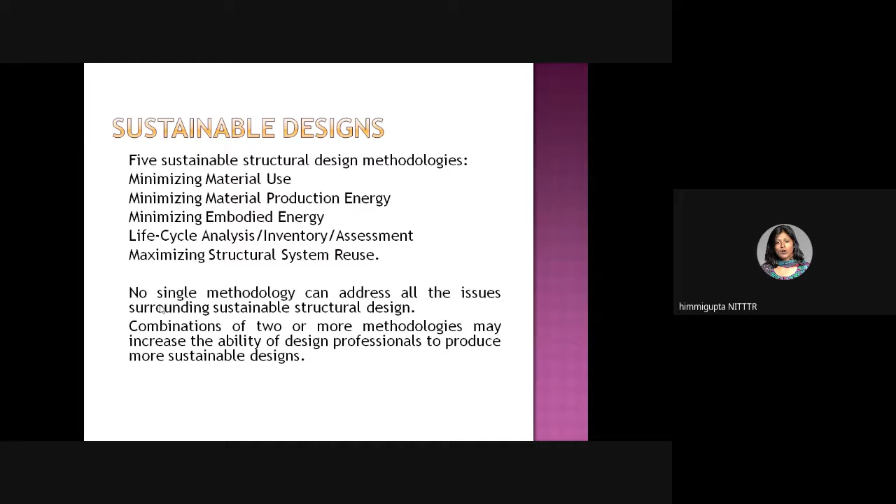We have to minimize material use, minimize production energy, minimize embodied energy. Life cycle assessment should be done, and maximum structural system reuse should be there. Make a building which can be reused later. Of course the solution will be different. Life cycle performance must be seen, don't just look at the initial cost. How much is the life cycle performance? That should be looked at. That is the cradle to grave approach.

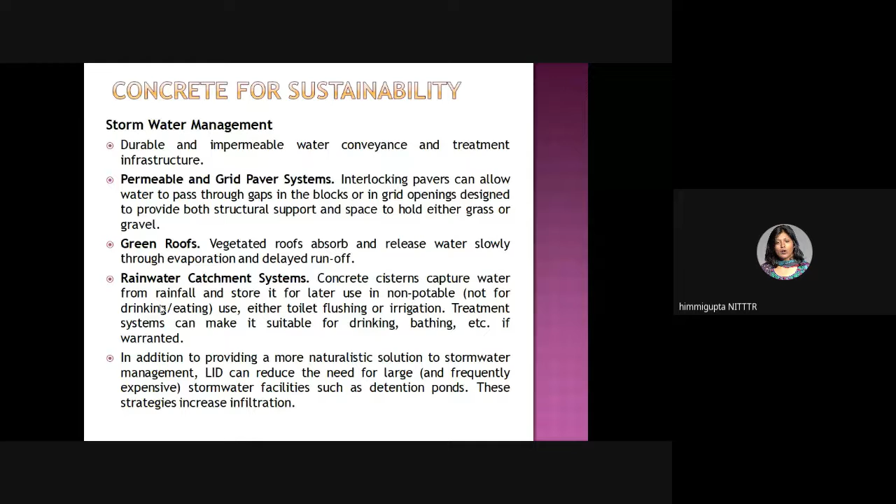There are so many materials, as I already told you. For stormwater management, we are going for permeable and grid paver systems, green roofs, rainwater catchments, all these kinds of things can be done. For design codes, as I said, this is 16700, the latest code which has come for structural safety of tall concrete buildings.

Now other advances, there are so many advances which have happened, like 3D printing materials, BIM, and all those kinds of systems. I'll show you some of this. This is one example from India only. One IIT Madras startup built the first 3D printed house, and the construction cost was cut by almost 30%. This is a computerized 3-dimensional design file, and that's what they used, layer by layer. That's how they have gone for a 3D printed building.

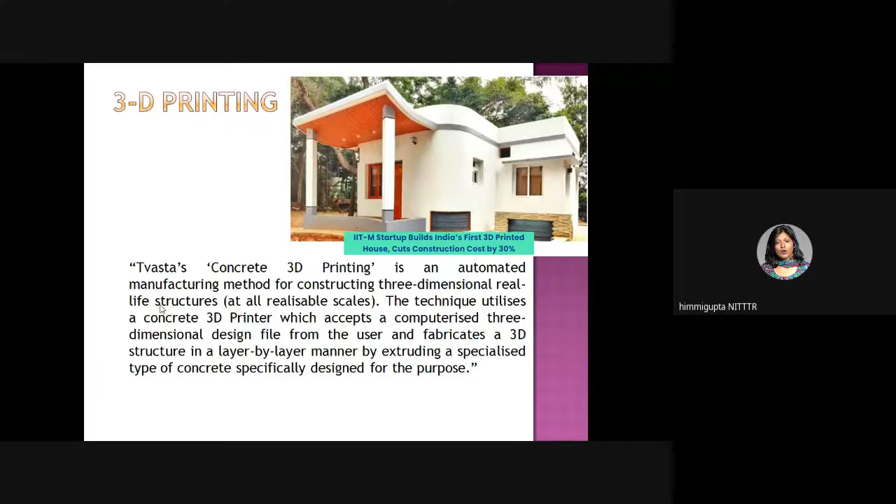As I said, we are now moving towards construction 4.0, wherein our construction is technology enabled, smart in all aspects. We are talking of prefabricated and modular construction, advanced building materials. I've shown you so many advanced building materials, smart concrete, fiber optic concrete, all those kinds of things.

Then there is 3D printing and additive manufacturing. There's autonomous construction, where you can remotely control all this machinery. Then there is augmented reality, visualization is happening, I'll show you. Then there is big data, wireless monitoring, cloud real-time collaboration. As I said, in BIM you are doing this, and nothing is being saved on physical hard drives, everything is cloud related. Cloud storage is there, then BIM is there. So that's what we're talking of with construction 4.0 now.

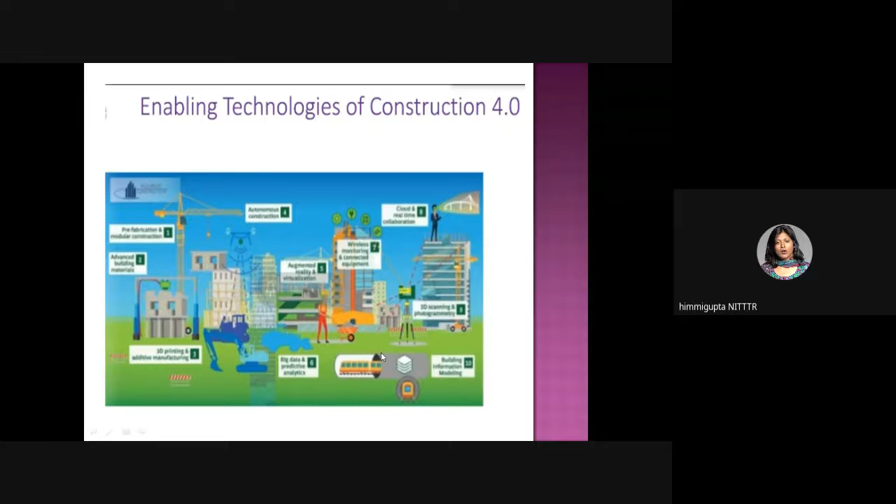IoT is big time now. It's not just IoT, but cloud, artificial intelligence too. They are not just restricted to computer science people, civil engineering has a big application for it, big time. IoT is Internet of Things, you can use it for so many things: fuel saving, security control, environmental monitoring, building structural health monitoring, managing workers efficiently. These are some of the upcoming areas.

I have interest in this. I myself conduct a special STC every year at least once for this part only, artificial intelligence and IoT. So there are a lot of applications there, teachers.

The construction industry now has the challenge of speed of delivery, reducing carbon footprint. This artificial intelligence is not only about machines and robots, it's also about developing algorithms which save time, save money, save any kind of construction cost or material. So it has been used everywhere, for project management, for design, analysis. So artificial intelligence is there.

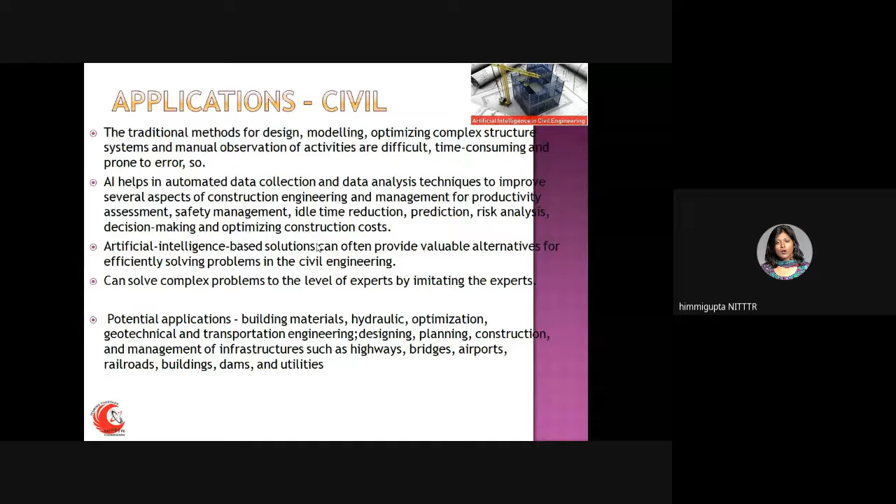You all have heard of techniques like artificial neural network, genetic algorithm, fuzzy logic, all these optimization techniques. Applications are there in all the areas, as I said, algorithms are also there.

Main areas, basically we are using reinforcement learning. These are algorithms using trial and error to do something in an efficient manner. You can use it for planning, scheduling for construction projects. Then there are predictive applications, trying to forecast something, like forecasting project risk, testing the viability and stability of solutions.

Then machine learning is there. You can train a machine, it can learn and do things for you. Simulations can be done. Then there is supervised learning for modularization and prefabrication. You can make a machine learn, and it can do all these prefabrication things for you.

Then there is image recognition, drones, 3D imagery. These days we are using it. You don't have to be physically present on the site. A manager, through drones and image recognition, can look after the workers also and see what is the progress on the site.

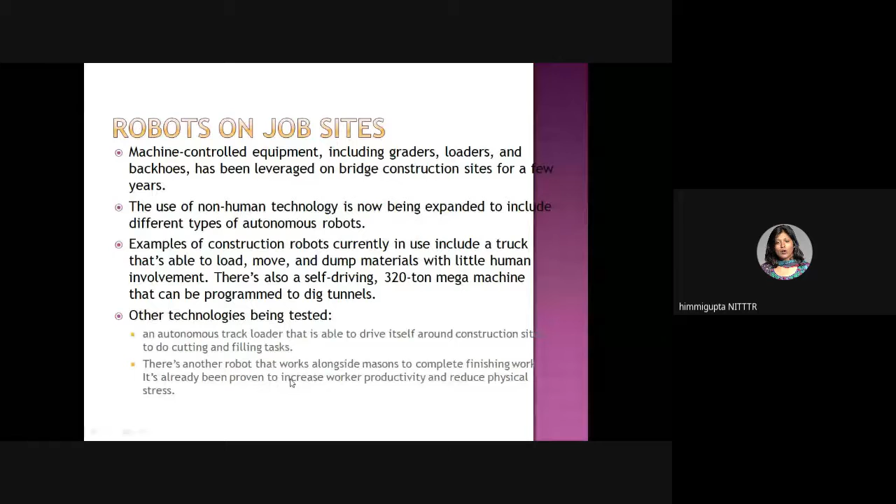This is already there. Japan is kind of very ahead of it. They are already using robots on their sites. Many things are there, like autonomous track loaders and all these things. They can make a simple wall for you, all those kinds of things are being done.

Now, what is virtual reality? This is also something which is very important for us civil engineers. Basically, it is not just about video games now. We can use it as simulations to train our workers also. Virtual reality is basically not actually happening, but you feel that it is happening to you. So that is why it is called virtual, but it seems that it is reality. That is why it is called virtual reality.

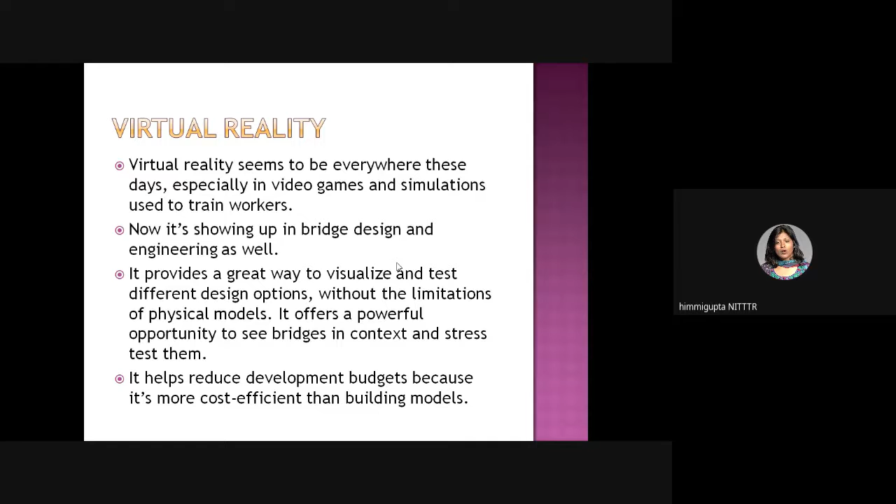You can visualize things, you can test different design options without having to make physical models of it. A very powerful opportunity for design projects. You can see bridges, you can train your people that when they go for tunnel construction, how things will look there. We can use it for training our students also, to teach them tunnel engineering, to show them how bridge construction is happening.

We can show them all through this. Then another is augmented reality, a reality which is being augmented by something. You are putting something more into a reality. So basically, maybe there is a site, with augmented reality you can put up a building there and see how it looks. So it is like you're just looking into options and don't have to really make the building itself.

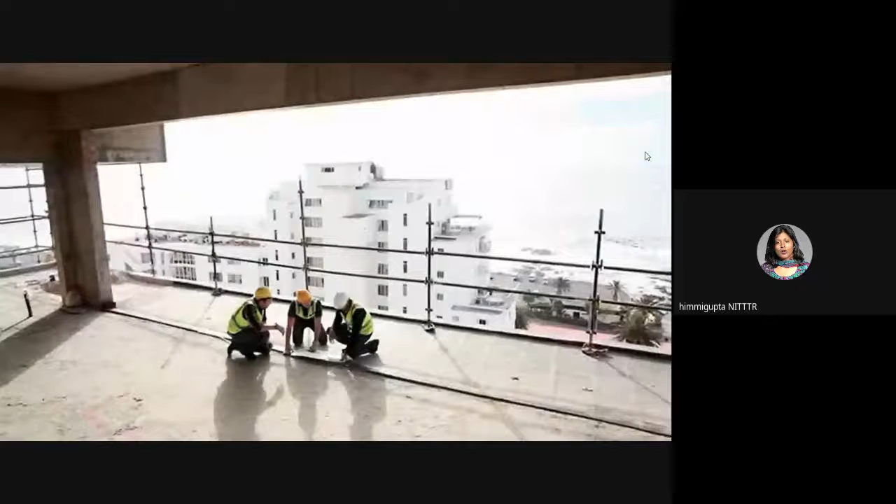Embraces technology innovation to address workforce challenges. Augmented reality solutions from SRI International have the potential to transform job site operations for construction inspectors by saving time, cutting costs, and improving safety with intuitive equipment and connected intelligence. Conventionally, the inspection process is done manually, often requiring more than one person, and can take a long time to document and circulate the information to others. SRI's computer-aided system can accurately track user location as they move around a large job site. With instant access to an intuitively searchable digitized database, an inspector is able to accurately align and compare what is being built against the building information model.

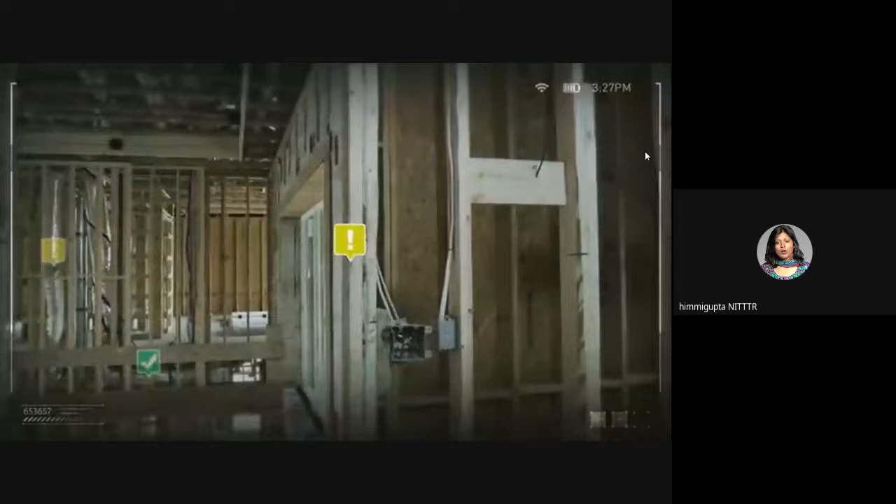So what you can see here is the model which has already been made in BIM. It is already programmed into these special glasses which this construction worker is seeing. So now what he's doing at the actual site, the work is progressing, and he's superimposing that BIM model to see if it is happening as planned. Are the things being made as required or not? So this is augmented reality, the reality which is already there, and he's augmenting the plans on it.

So even checking the dimensions, manual measurement here, processes become automated and more accurate.

Capturing and documenting data becomes less time-consuming. The inspector can snap photos on demand or add and retrieve virtual notes that stick to a location, which can be shared across multiple devices.

Problem areas become easier to recognize, and serious concerns can be identified and shared instantly with those who can immediately respond, preempting major structural errors and costly rebuild time.

Information, including important inspection notes, design safety reports, and even contractor reviews, are stored and can be recalled for use in the planning of future projects.

SRI's vision technology can change the landscape for construction inspection by providing efficiency and higher accuracy while saving time and money.